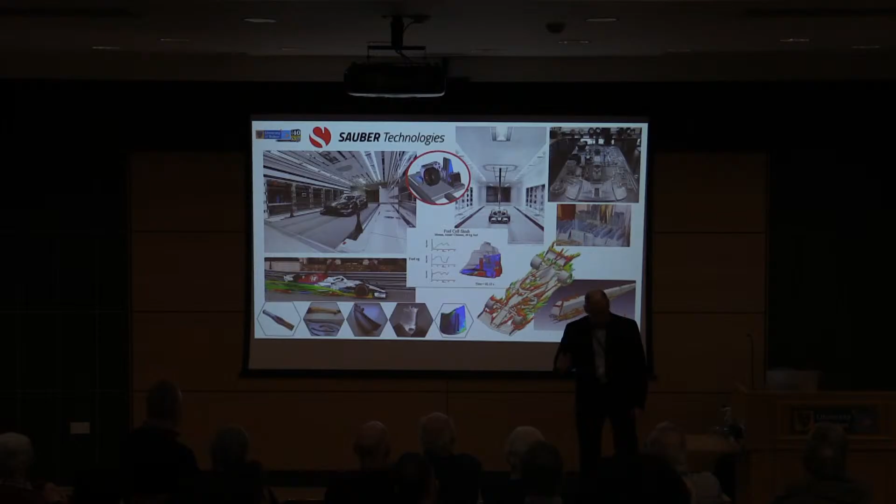A number of teams, when they launched their cars in the last few years, have done a digital launch. And when they've done that, perhaps the students out there in the world have been brighter than, or more aware of, the special tools available than the IT departments in the Formula One teams. A number of teams have had the shape of their cars, let's say, hacked.

You can understand the technical departments will never release the real Formula One car to the marketing people without modification. So in the Aero group at the Sauber company, Alfa Romeo team, the head of Aero design will always stretch this, delete that, thicken that, move this, before it goes as a model to be made for manufacture as a toy. You sort of have to do that. You can imagine if you've got 1 millimetre thick parts on a full-scale Formula One car, you scale that for a toy, it's unmanufacturable.

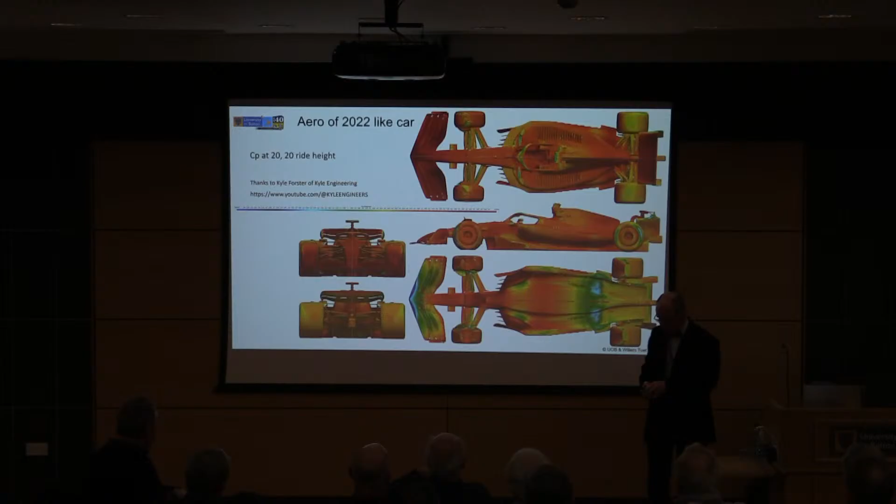But mathematics is fantastic. So you create what we call CPZ - in the Z direction you have a coefficient of pressure, and you convert it so that whether it's above or below, it tells you the difference in pressure relative to atmospheric pressure. If you have anything that's blue on the scale, that's creating downforce. Anything yellow and red is actually creating lift.

So you're creating a little bit of lift in this area where you've got these three turning vanes, vortex generators, whatever you want to call them. But overall, even though you lose here, that creates a change in flow that is beneficial overall.

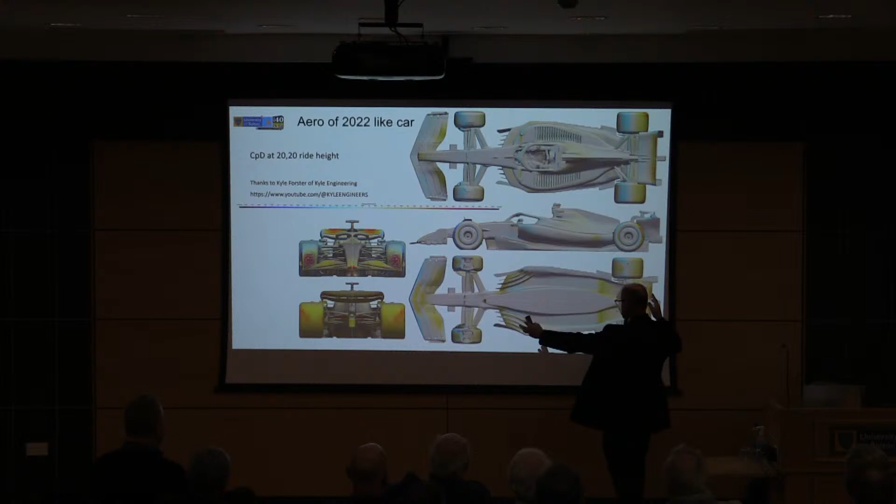Then this plot is CPX, so that tells you the drag, or CPD, drag - it tells you where you're creating drag. There's not a lot happening on the top surface, there's not a lot happening on the underside. It's all happening really in the front and rear view.

For an aerodynamicist to plot like this, you would normally look at this on a much higher resolution screen. This has simulated oil flow on it, and off-body there's a simulation of what's happening with flow rotation, with vortices. That's the sort of thing we would be looking at in great detail, probably in many, many slices going through the car.

A vortex occupies a circular space, it's round. So depending upon the size of the volume you have - in the past in Formula One we had a flat floor with a diffuser and lots of strakes in the diffuser, each one with a vortex inside doing some work. But that was because you had a fairly wide, shallow area with room to put a number of small vortices. Whereas the exit of this is quite big, and in the end you've got room really for one big vortex.

So you can see games are being played - a little bit of air is being let in there to create a second vortex, and these three all add up to create one big powerful vortex that's strong enough to make its way all the way down the car.

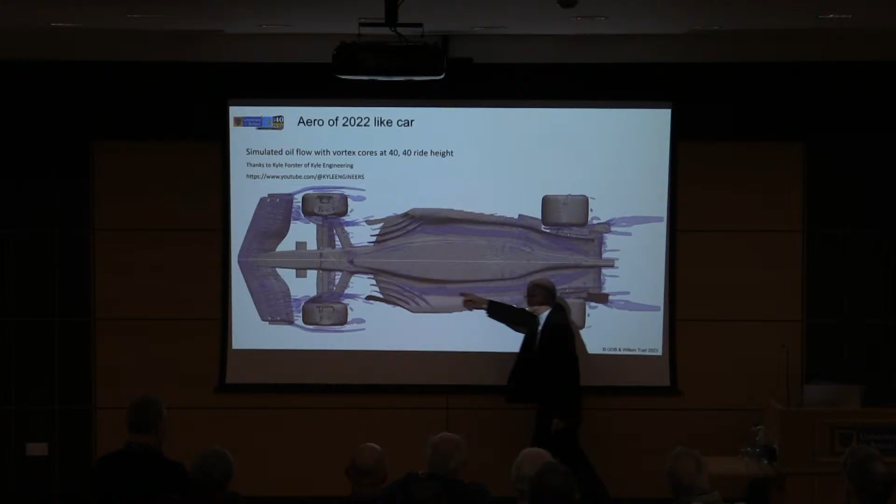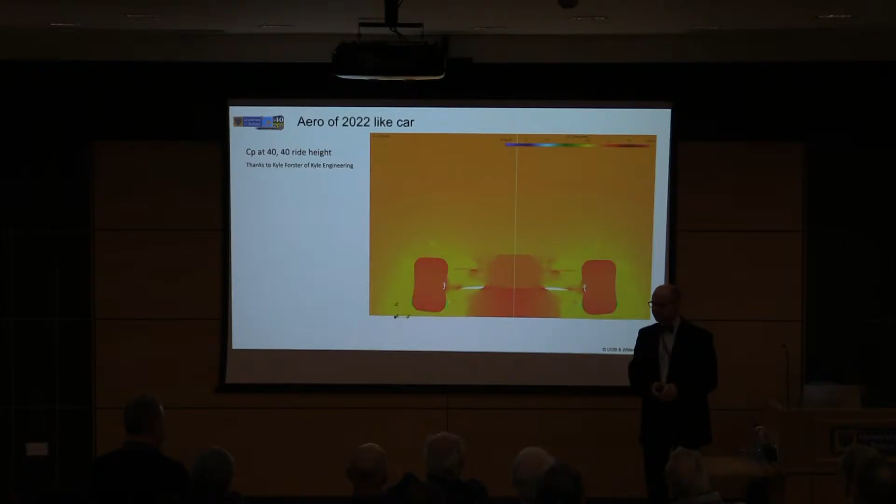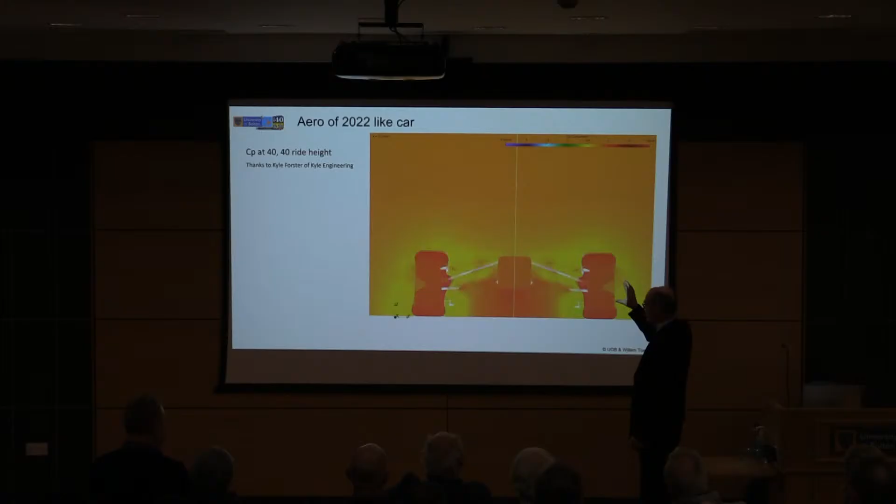So this is stuff in Formula One. Outside of the Aero group, nobody sees this stuff, and I reason it's not the real car anyway - the rules have already changed for next year. Nothing I'm showing here would teach a junior aerodynamicist who's got a job in Formula One anything, but it's interesting for people who are not in that position.

Now I'm going to go back and talk a little bit about some fundamentals of aerodynamics. It would be nice if aerodynamics was simple, but then you wouldn't need a big aero department in a Formula One team. Aerodynamics is really complicated. It's just made up of molecules.

We are in atmosphere, and there are kilometers of air molecules - oxygen, nitrogen. Nitrogen's the biggest, then oxygen, carbon dioxide, water, and then lots of little ones - helium, hydrogen, xenon. There are lots of other gases in very small numbers out there.

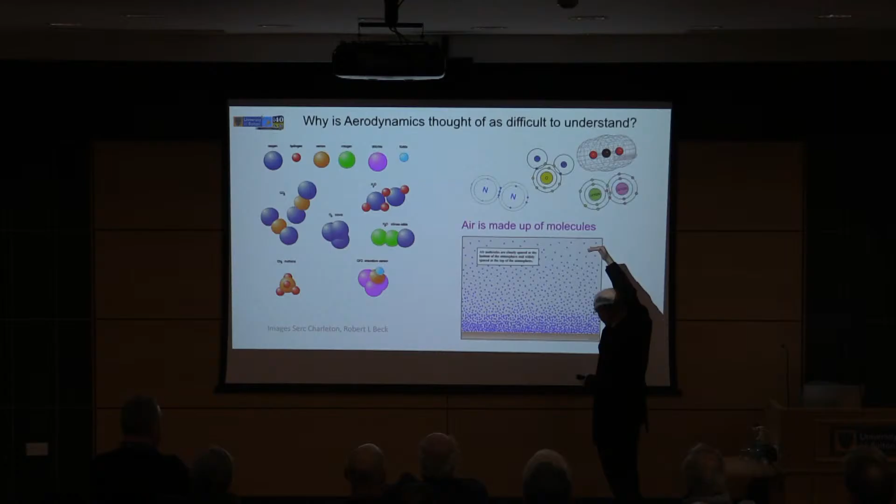Air pressure increases as you come down, and by the time you get to sea level, the air pressure is about 10 tons per square meter - a bit more than a yard for us oldies, square. If you have a vacuum on one side and normal atmospheric pressure on the other, that's 10 tons. So if we're trying to generate 2 or 3 tons on a race car, we only have to generate less than 10% of a vacuum. So you have less than 10% of the molecules hitting the surface, and you're going to generate huge forces.

And that's why the aero groups in Formula One are so big, because you can make such a difference. And there are a huge number of molecules in the air.

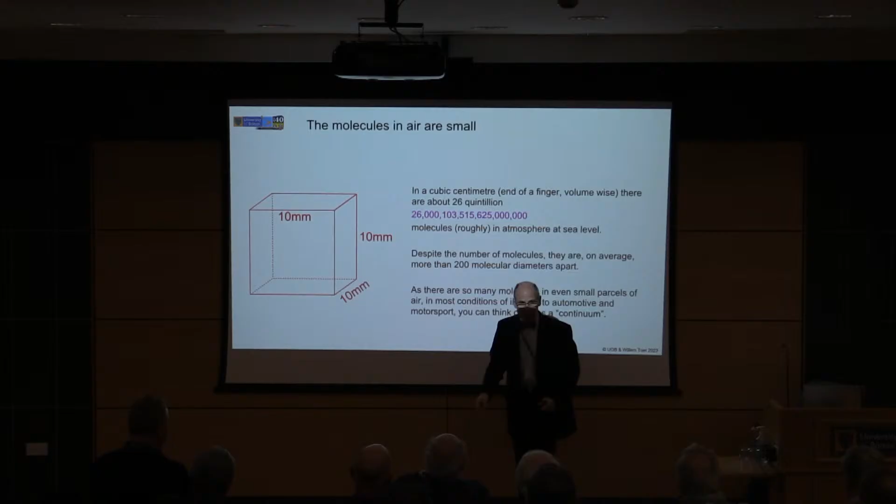26 quintillion - and I've written it out because 26 quintillion, it depends how big your finger is, but the tip of an average finger is probably going to be a cubic centimeter. 26 quintillion - that's a lot of molecules.

Now, not only that, those molecules are actually a long way apart relative to their size. And that's what's actually quite special about aerodynamics.

It was a botanist who was a really keen microscope user, Robert Brown, in 1827. He was looking at pollen particles in water under a microscope, and they were just sort of jiggling around, which he couldn't understand because it's just in still water.

It was Einstein, 80 years later, in one of his first contributions to science, who postulated that it was water molecules hitting the pollen particles that was causing this random motion. In those days it wasn't understood - we didn't know how big molecules were.

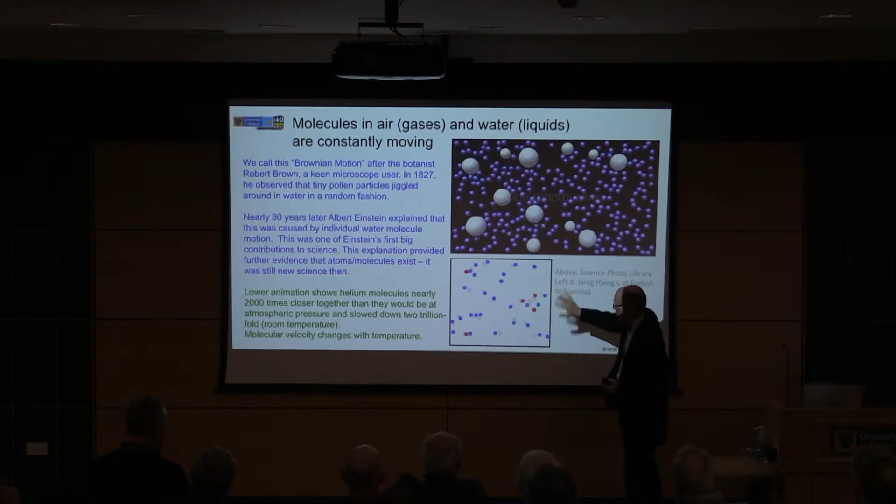This lower simulation carefully scales helium molecules in air, in a gas. The helium molecules are about 2,000 times closer together than they would be at atmospheric pressure, and they've been slowed down so the simulation looks right - slowed down about 2 trillion fold so you can see the motion. So this Brownian motion is staggeringly fast.

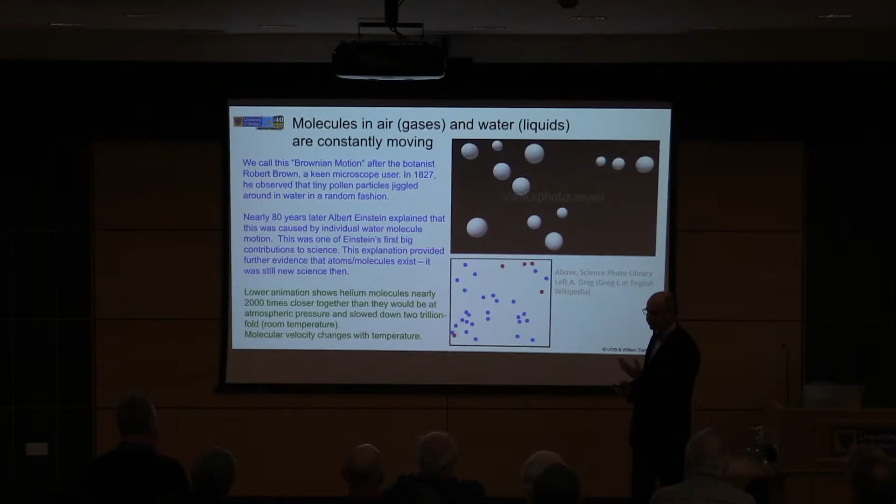And this is what makes aerodynamics so, if you like, challenging and fun. You can just imagine if we're having a bouncing match - I'm only a little fella, so if I come against a sumo wrestler and run like hell and bounce, he's probably not going to move very much when I bounce off him. The same happens with molecules.

The heavier molecules have more kinetic energy, and when, say, a hydrogen molecule bounces off them, it gets thrown further than the other molecules. So each mass of molecule will have an average velocity distribution.

And if you look at the distribution and then ask, where is the speed of sound? Well, the speed of sound is about 1,247 kilometers an hour, 775 miles an hour, or 346 meters per second. We always, in aerodynamics, tend to talk in meters per second. It doesn't sound like much, but it's quite a few miles an hour.

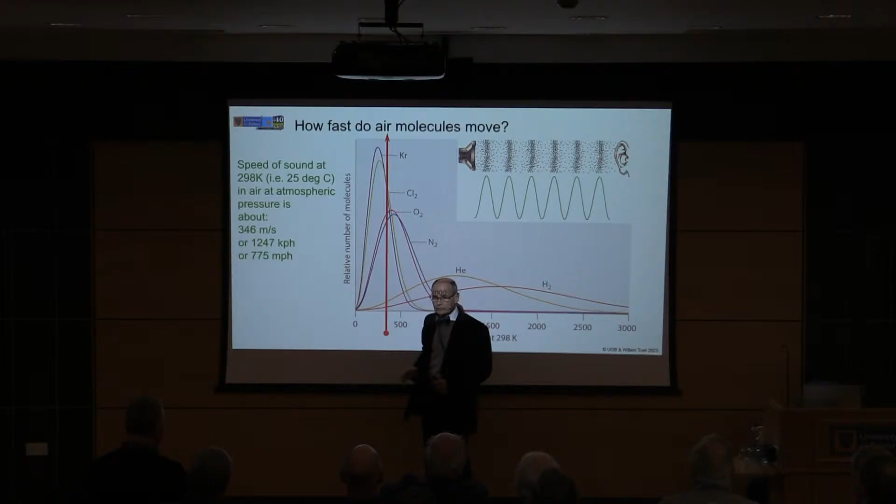And if you look at your average molecules, the majority are nitrogen and oxygen, so they're traveling faster than the speed of sound. But there's about 200 molecular diameters between the average interaction between molecules. So you can imagine - and what is sound?

What do you hear in your ears, ignoring the microphones and speakers? If we imagine we turn those off and I'm talking, I'm moving molecules in my throat. That vibration travels through the air at the speed of sound, and you hear it. So at the back of the room, you can hear me speaking at 346 meters per second.

There's probably, I don't know, 10 meters back here, something like that. So it's not many decimals of a second - it's really fast, and that tells you there can be a great deal of mixing within the air, which is one of the next things that makes it deliciously complicated. And then the velocity of molecules in the air is, if you like, a measure of temperature.

So scientists will talk in terms of absolute temperature. minus 273.15 degrees C is absolute zero. At absolute zero, all molecular motion stops. We can't get to absolute zero, but we can get so close that the molecular movement is so slow that we know at zero it will be stopped. The molecules don't move. In space, depending if you're in the shade of the sun or not, and then as temperature increases, the molecular velocities increase.

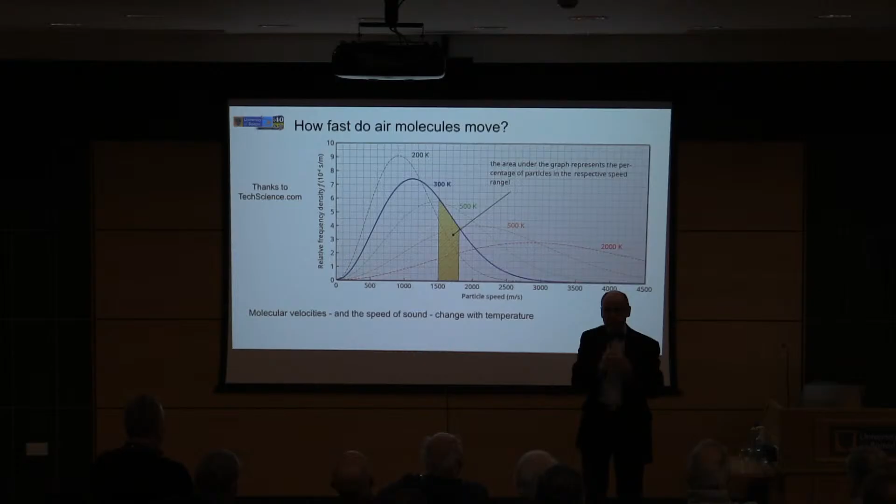So when the space shuttle comes back into the atmosphere, or a rocket comes back into atmosphere, the rocket is traveling fast but in space everything else is stationary. When the space shuttle comes back into the atmosphere, what it sees is gas that, as far as its velocity is concerned, is mega hot. Both are cold if you're stationary with the atmosphere or stationary with the rocket. But when the two meet, that relative velocity means you've got massive heat.

So I'm going to get now very quickly into a few laws of physics. Aerodynamic forces increase with the square of speed. Why the square of speed? If you're traveling at a certain speed, you're interacting with, let's say, parcels of air.

Let's not go molecular size because they're jiggling around so fast you can't do anything with them. But let's go, let's say, a millimeter squared. If you go as big as a millimeter squared, there's like a low-pass filter between every scale within aerodynamics. So you go from your molecular scale up to, say, a millimeter squared - that's huge numbers of order of magnitude. The air can be effectively very still.

So you punch through at a certain speed, you will interact with a certain number of parcels of air, and with each one you will exchange a certain amount of force. Then you go twice as fast, you're going to interact with twice as many particles, but every interaction is going to be twice as hard, exchanging twice the force. 10 times the speed, and you'll interact with, in the same time frame, 10 times the number of parcels of air, exchanging each time 10 times the force. There's your square law. That's the simplest way I can think of explaining it.

Probably the most famous equation in aerodynamics is the Bernoulli equation. Bernoulli, observing airflow and aerodynamics, thought that the pressure acting on a surface was the result of molecules impacting with the surface, and that is what happens. So you can imagine, if you slow everything down a little bit, what might happen, say, on the back end of a car, where you've deflected air away. On the back end of a car, when it's punching through the air, you're likely to have fewer interactions on the rear surface of the car. That sort of thing is relatively intuitive.

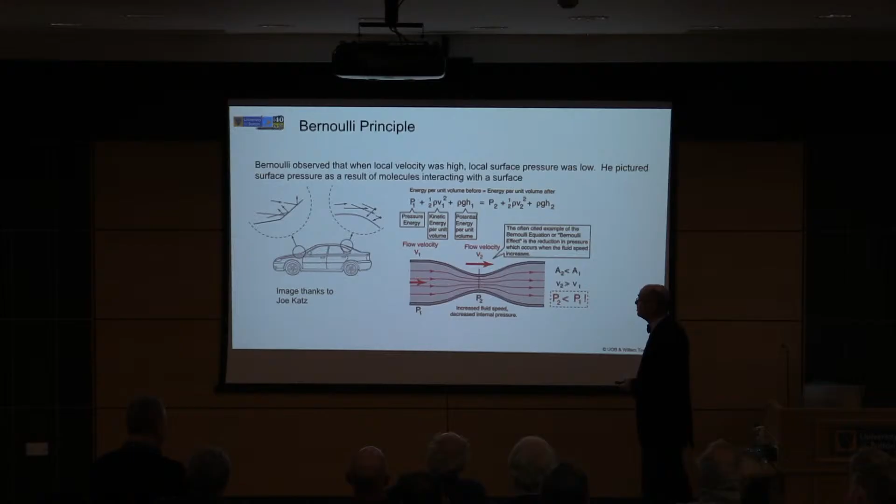But how do you get an intuitive feel for the Bernoulli equation or effect? It has to be along a streamline. Now the key is Bernoulli observed high velocity near a surface, low pressure on the surface. But the shape of the surface is important, so the velocity would be along a streamline.

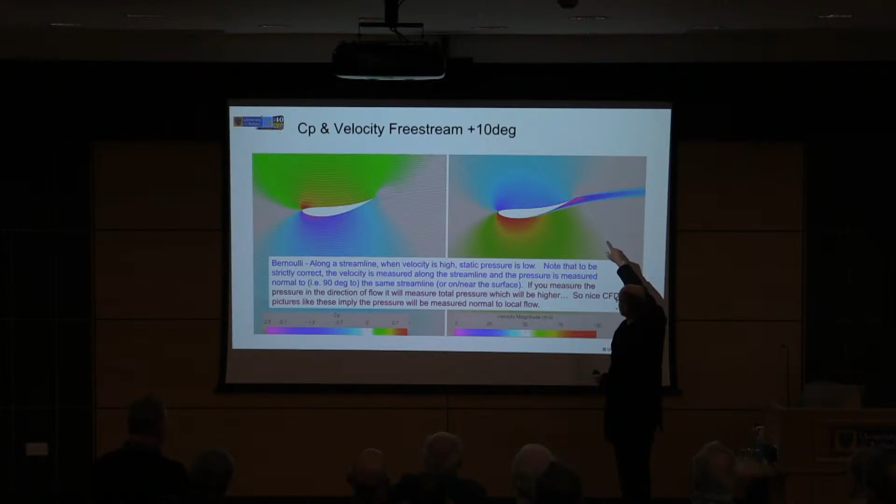So here on the left-hand side, I've got the coefficient of pressure. Purple is a low pressure coefficient, red is a high pressure coefficient. So anything beyond the grey - the green, yellow, red - is higher pressure than standard. And over here on the right, I have the velocity magnitude. Purple is virtually stationary - effectively, what you're doing, if the wing's going through the air, is being dragged along with the wing.

Where you have low pressure, you have high velocity magnitude. This test is being done at 50 meters a second, and the highest velocities get close to double that, fairly close to the wing. Fairly close, not on the wing, but very close. But the important thing to remember is that you've got to measure the pressure on the surface.

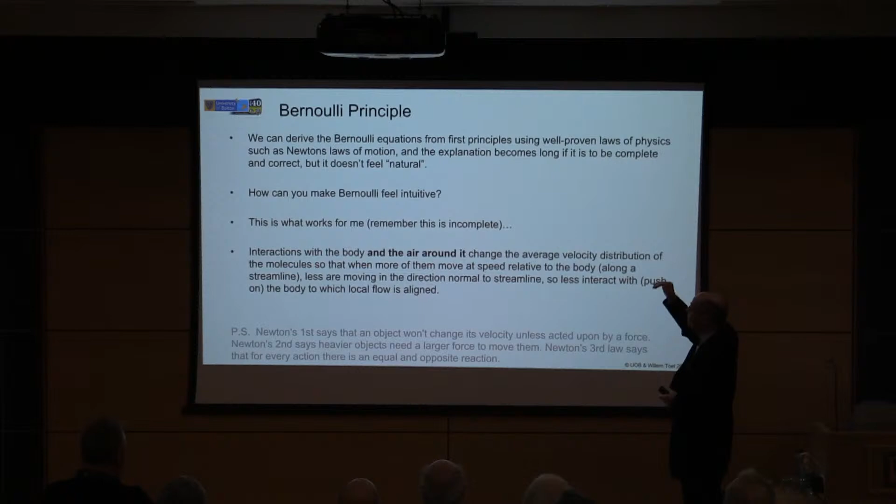At 90 degrees to the direction of flow. So this is my oversimplified explanation of the Bernoulli equation, or the Bernoulli principle. You can derive the Bernoulli equation, and most of the equations that we use in aerodynamics can be derived, and I do teach deriving.

For some people it's like, oh, I think I'll fall asleep, because it's heavy mathematics, but you can derive the very long equations that we use in aerodynamics from first principles, just using very simple laws like Newton's second and third laws. Newton's laws are to do with heavier objects need more force, an object won't change direction or velocity unless a force is applied, that sort of thing. Where a force is applied, you get an opposite reaction. Simple laws that we all understand have been well proven.

You can use those, but that's not going to give you the feeling. So for me, the explanation I use that helped me to get the right feeling is interactions with the body and the air around it change the average velocity distribution of the molecules.

We're not getting into a supersonic aircraft punching through and changing the velocity of the molecules dramatically, but the fact that you can get this fast, distant exchange between energies within the flow mean that the leading edge of an aerofoil or a car, the leading edge of a body, will interact with the flow, and instead of having the pressure acting the same in all directions, you're aligning more of the molecules in the direction of flow, and therefore less of them are interacting at 90 degrees and touching on the surface. And for me, that's the Bernoulli principle.

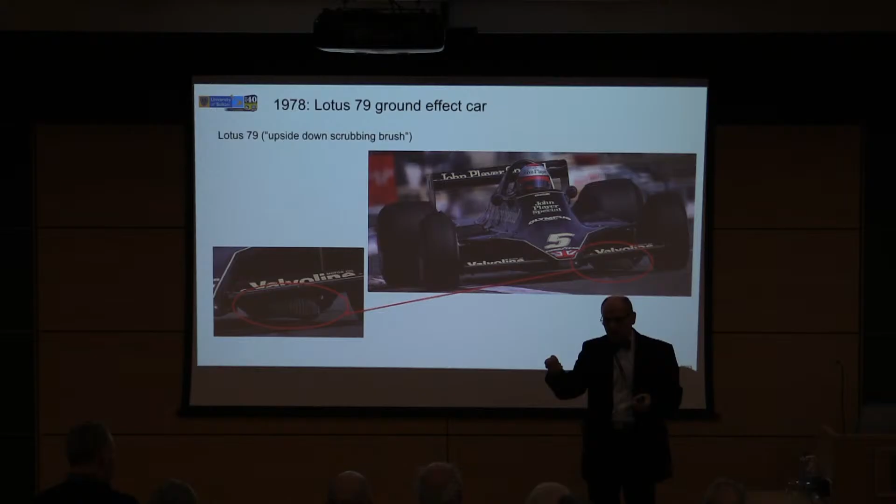They're kinked, which wouldn't work in motorsport, because in motorsport we always have a maximum width, don't we? And you want the maximum power out of the width you've got, so you just go poof, to the end and bang.

So at first, I'm going to use this button, it's easier.

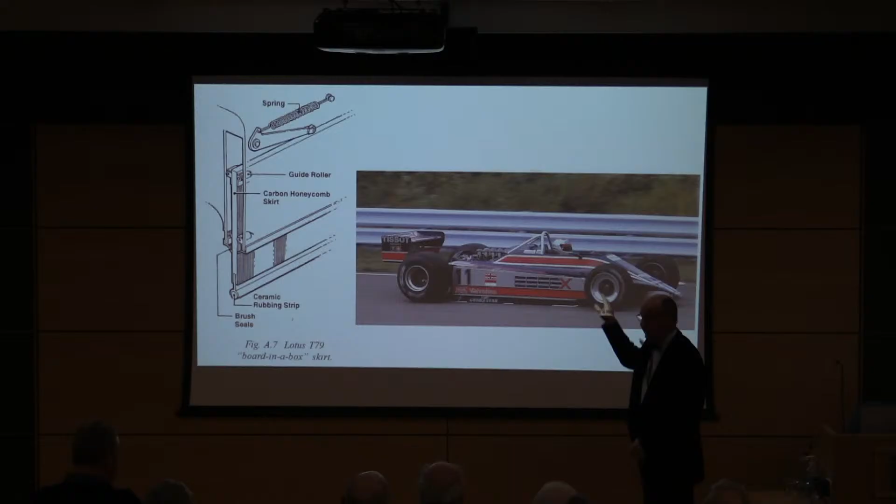At first they started with brushes and then hinges and all sorts of things, and all the teams ended up with effectively a really narrow little containing box and then a sliding skirt, and they all settled on a ceramic rubbing strip, because you can get ceramics that basically didn't wear away. People would try a Teflon strip first, and Teflon's nice and slippery, which is good. Ceramic's pretty slippery too, but the ceramic didn't wear, so the skirts would last a little bit longer.

And we're very lucky that here at the university, Bob Fernley, who's a university graduate, he's a doctor, has formed the Fernley Foundation, and together with Jonathan Kendrick, he runs Rokit. You see Rokit sponsorship on a number of Formula teams, including some Formula One cars.

Both started life, and I'm the same, in what you might call an underprivileged background. My dad died when I was 6. I left home at 16 because I got put in to be an apprentice, and I thought I'd rather give myself more options. So at 16, I'm on my own, and I've got to figure out how to educate myself, how to survive, live, earn money, everything. So I absolutely love the fact that there are people out there who are willing to try and help those who maybe don't have a standard chance, and I'm all for it.

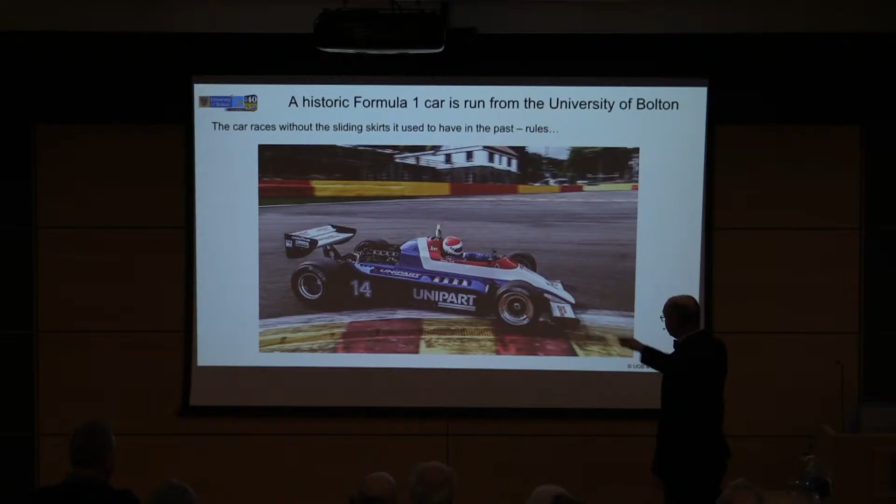So anyway, we have available to us 2 of these cars. One is being raced and prepared by staff, students and help. It's got to race without the skirts, and you can imagine it's a Formula One car. It's the easiest generation to work on, but it's a Formula One car. They're worth a lot of money, and they're not simple, so you can't let the students loose on their own, but with supervision, they're able to learn and do a great deal, which is utterly fantastic. And this car is a winner. It races in historic races, and it's a winner. Had a double win at Silverstone last year, the year before, 21.

But of course, we also want to do a little bit of science. So with help from a company called Evolution Measurements, who supply a lot of pressure measurement equipment to Formula One, they have these little stick-on discs. They're a bit over 1 millimeter thick, and you stick them on the surface, and you do get a little bit of a ripple in the airflow around them. Here are the little discs taped in place with aluminium tape, then you rub it down as smooth as you can, and make sure the pressure tapping tubings that you use to connect to them are running in the direction of the airflow. They supplied us with 256 pressure sensors and all the kit needed to measure it, and we went and did a truckload of testing with that on the car. So you can imagine there is some aerodynamic disturbance, but you get a bucket load of data.

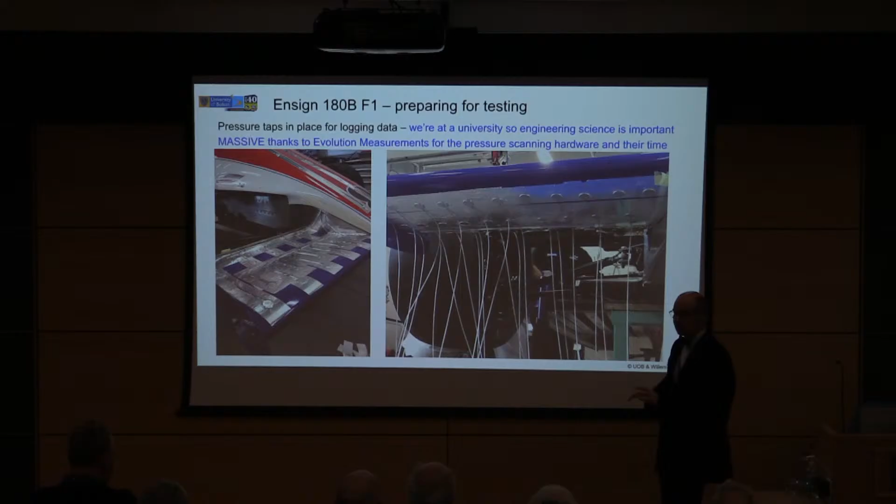Then students, staff and commercial helpers, the company who supplied the Faro arm, and a company who are professionals at scanning, but also with student and staff help, the car was scanned inside and out. From the scan, CAD was created. So once you have the scan, now we have the CAD, because where do you get the CAD of a 1970s, 80s Formula One car? It's all on paper, and you have to recreate it, and you have to know how it was done three-dimensionally.

I learned to create 3D shapes from 2D drawings when I joined the Toleman Group team in 1985, and for me it was a baptism of fire, because it's not necessarily easy. It's a skill where you have to have physical capability, make a load of slices and put them together, and work out how to wash between. I had the help of a really good pattern maker who taught me the skills to do that. But nowadays it's all on computers, so you need the same level of skill, just a different type. You have to do it all on computer. What was fantastic, I think, about creating the car in this way is that it's a warts and all, if you like, aerodynamic surface. Instead of having the perfect design surface that the engineer had in mind, it's what's really been built for the car.

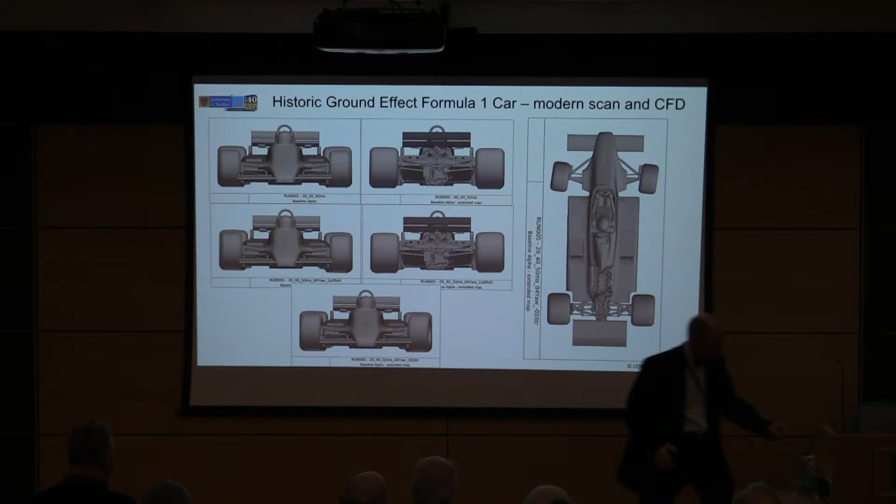So if you look at a few images that come up here, you can see on the side panels there's some ripples, you can see fixings. This is real stuff.

Phones on silent, please. I have had it before where I'm in the middle of giving a lecture here at the university, in the middle of giving a lecture to the class with the students, and my nephew rings up. Oops. And he was persistent too.

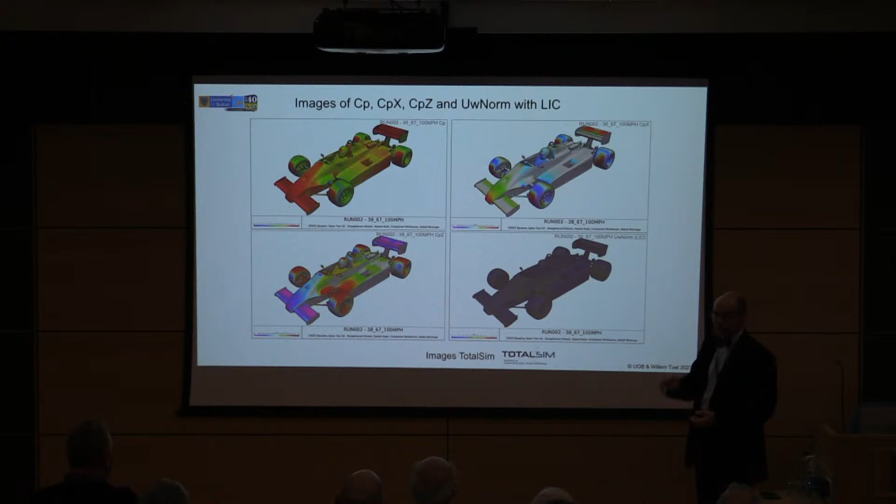So this is just an unbelievable opportunity. So we've had the CAD of the car, and we've now done CFD runs of the car, computational fluid dynamics, computer simulation of airflow, like doing a wind tunnel in a computer. Computer simulation tools get better and better every year.

I was actually on holiday in Australia about a year ago, and I would log on to the computers doing this simulation work. I realized the computers were completely empty one weekend, so I just went mad and submitted a load of cases, then apologized to the commercial person whose computer we were using afterwards. We did a bit of a deal, and I managed to get a pretty complete aerodynamic map.

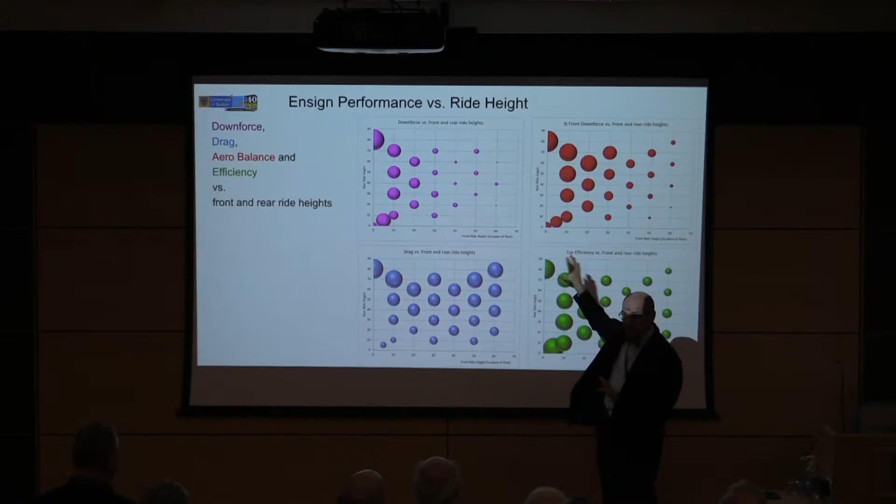That is at 0 front, 0 rear - that's a car on the ground. Now it's never going to run on the ground. This car didn't have particular problems. This is without skirts, because that's how we race it. But for me, this is an alarm point, and we'll get to why.

So we can see various trends. If you want downforce from your floor - or total, because the floor is dominant in terms of downforce - you want to be low on the rear, and also a bit low on the front up until you get to 0. Even at 5.5, your maximum downforce is actually there, but you've got another good point over there. So the front ride height is a really dominant one.

And I forgot to mention, this car with skirts would probably have had a porpoising problem because it comes a little bit earlier. It was the racing driver Mario Andretti, driving the Lotus, who first used the phrase porpoising - he'd seen dolphins and porpoises, and said the car's porpoising.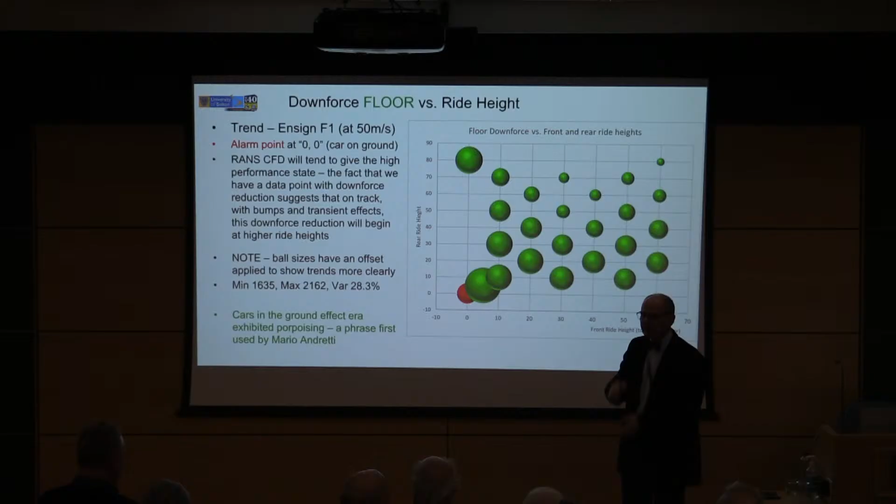So we did some runs - I only did three runs with the skirt fitted onto the car. At one of the ride heights, 50-50, which is relatively high, 2 inches, 50 mil front, 50 mil rear lowest point to the ground, there's quite a difference in the pressure distribution - not on the front wing, not on the front or back of the wheels, but on the whole of the floor area and the rest.

You can actually see there's a negative effect on the rear wing because the floor is working better. You can also see that, for example, this is a downforce generating area, but you're getting some lift around the front wheels and a little bit of lift around the rear wheels as well. That's pretty standard for an open-wheeled car.

So then we get a pressure distribution - above is the baseline case, below is with the skirts fitted. If you look at the top surface pressures, it's quite hard to see a difference. By the way, if you really want to look in great detail at something like this, you take a grid of vertical and horizontal lines in exactly the same position relative to the car on both cases, then look square by square within your grid to really zoom in - that's what we do. We wouldn't just look at a picture like this, it's too generic.

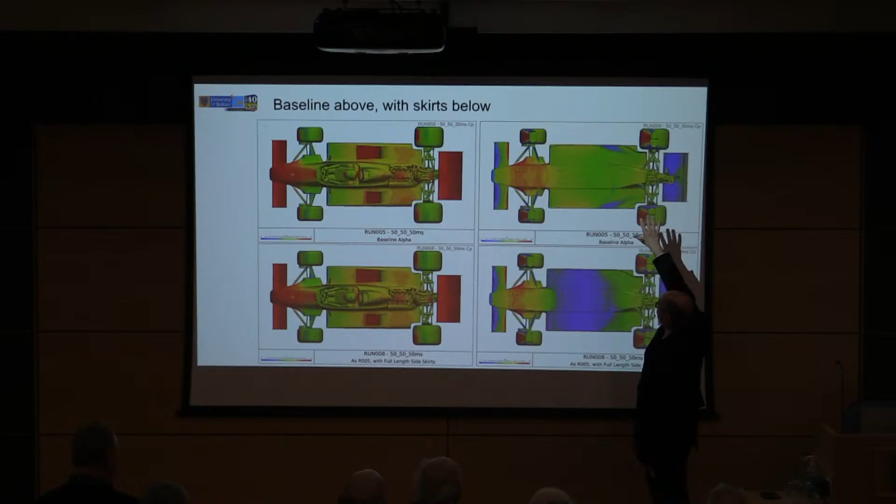But the difference between the pressures on the underside is so dramatic as far as I'm concerned. There you have a reasonable amount of low pressure, but here you've just got another world of low pressure.

You see it as well in these plots, which are quite interesting. This is called an X-ray plot - you look all the way through all the surfaces of the car, add up all the pressures, and see in this location of the car whether you have downforce or lift. You can do the same with drag. This one looks at flow rotation, vorticity, and if it has a vortex, colors it by how much energy there is in the flow. So you've got vortices coming off the leading edge of the sliding skirt in this case, but vortices coming in further back that do quite a bit of damage to the flow.

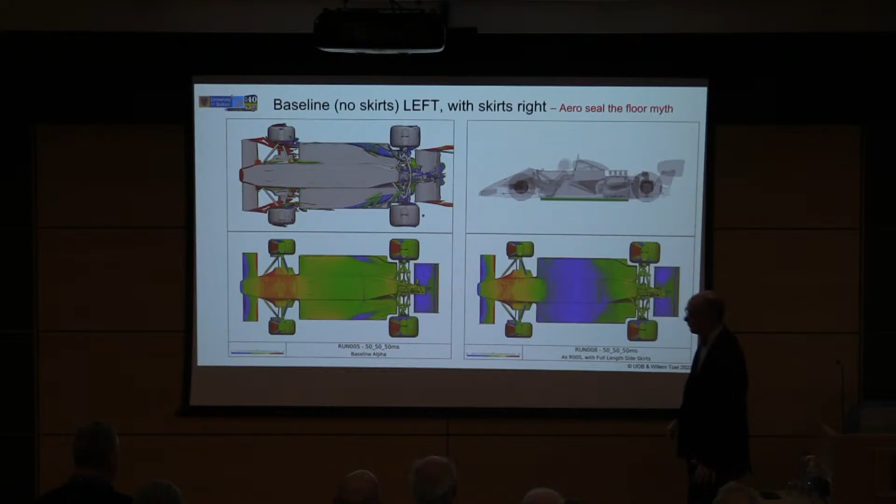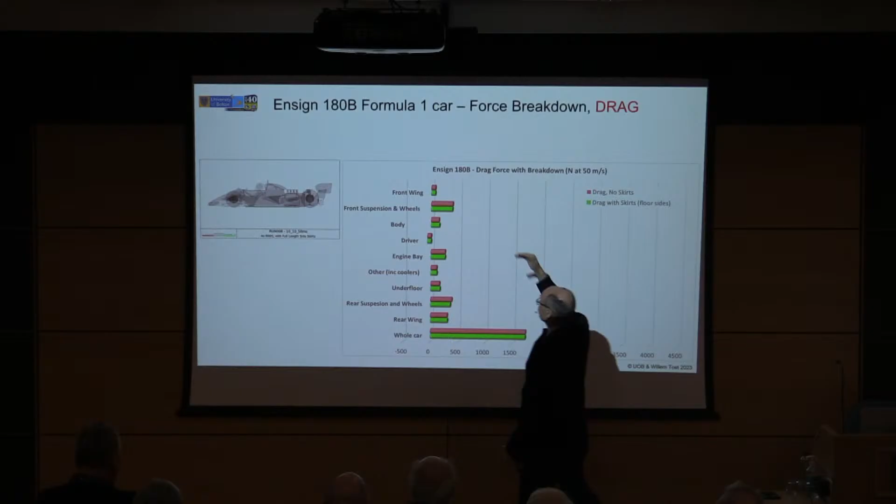I thought, okay, why don't we do a bit of a plot of the breakdown of drag and downforce. What I've done is I've taken three baseline cases, averaged the numbers on the three, and then three of the test cases with skirt, and just looked at the average of the baseline and the average of the with-skirt. When you look at the drag numbers, front wings only got a tiny bit, front suspension and wheels got quite a bit, the body has quite a bit, the driver has negative drag, so that means the driver's helmet is actually being pushed forward by the flow.

It's not the first time I've seen that. Engine bay has some drag, other bits, coolers and so on have some drag. The floor has some drag, a bit more than the front wing, not as much as front suspension and wheels, nowhere near as much as rear suspension and wheels, and nowhere near as much as the rear wing. Then whole car, all added up together.

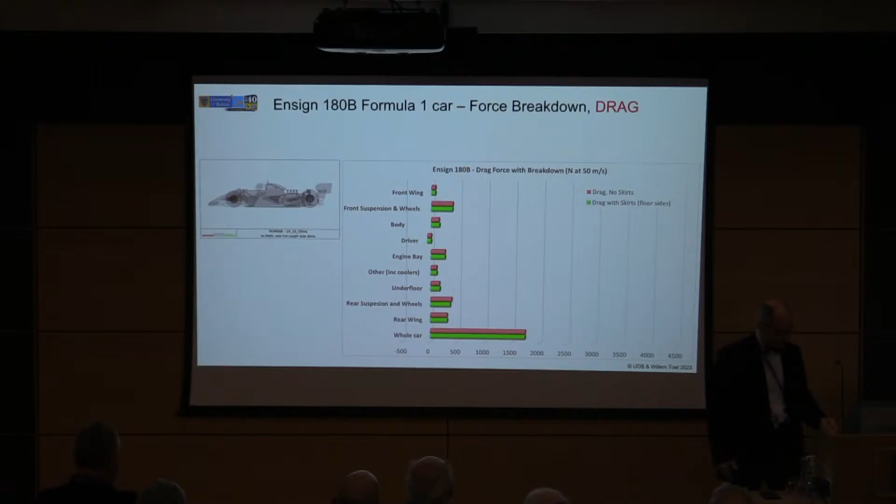Then we look at downforce, and suddenly, instead of there being nothing in it, there's like one item that's changed dramatically, and that's the floor. What's curious is, you look at your rear wing, there's a pretty subtle difference on the rear wing, almost nothing. You'd have to say pretty much dominating the difference is the force on the floor. The average force difference over the three ride heights is about 57% more downforce just by adding those little bits, bridging the gap to the ground.

Monstrous. Now from here, because the skirts in the ground effect era made so much difference, people talk often in the press, motoring press, TV, about using airflow to seal, say, a floor to the ground. That is absolutely not what we do, and I'll explain a little bit later what we do.

The other thing I wanted to mention here, the biggest, at the highest ride height, where it's very easy for air to get under the floor if it's at a high ride height without skirts, at the highest ride height you got a 74% gain in car downforce. Huge, just huge. If you could do that on a car today, you'd be an absolute hero. They'd be paying you millions.

I'm hoping there's someone out there bright enough to invent the next one. Because every generation learns from the generations before and makes their next steps, and we've done that. We've made our steps. But there's always more to learn and more to gain.

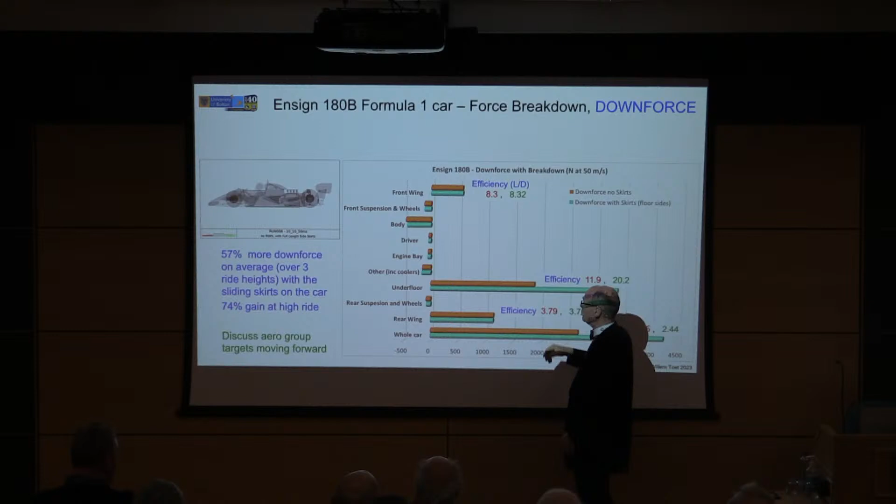The front wing has an efficiency of 8.3 to 8.32 with the two averages of the two types of car. And the floor has an efficiency of 11.9 and 20.2.

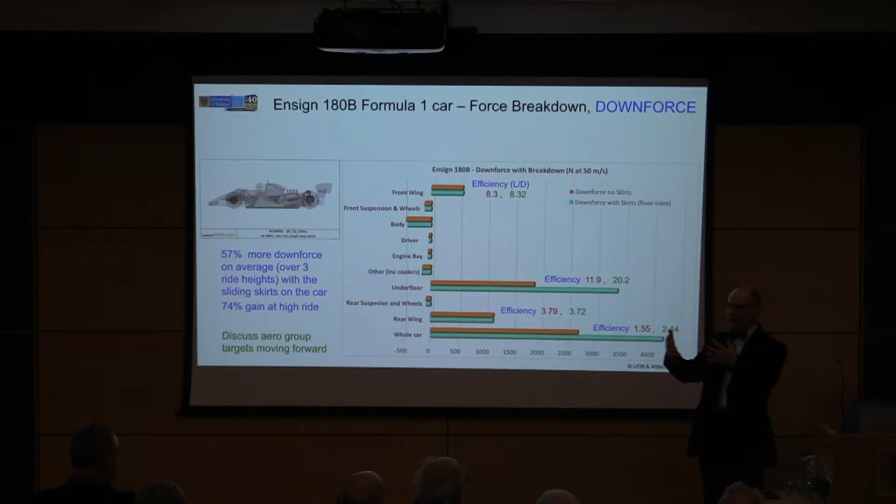So for the last 25, 30 years, depending upon what the rules were, I've been pushing my people: get the floor more air, make the floor work harder, because that's your most efficient device. You make that more powerful, you make the car more efficient. So taking an overview, that's about as much detail as I can get into, which is very boring.

Now, what is ground effect? If you take a wing in free stream, just in the middle of air, and you change its angle step by step, you'll be able to see that the pressure distribution around it will change. You can see the airflow lines, and you can see that the airflow is being bent by the presence of the wing. I've got varifocal glasses, but that's definitely not a straight line at the bottom.

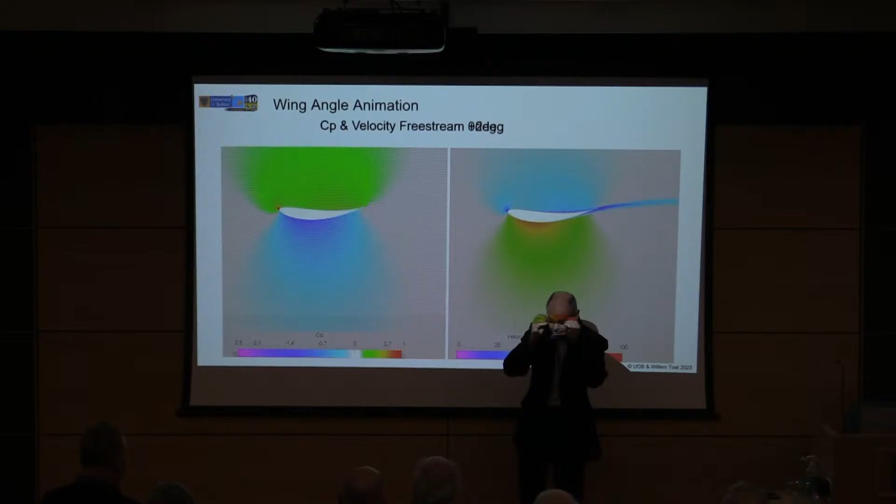You can see the pressure distribution and the velocity magnitude, and as the angle changes, you also see a little bit of stalled flow coming towards the end. What's really curious is that maximum angle I go to, which is 16 degrees on this particular design of flap, it still hasn't reached maximum force, even though you've got some recirculation on the trailing edge.

Aerodynamics is deliciously complicated. Then if you take the same wing, I just pick an average angle, 6 degrees, and we then take the ground up towards the wing. You can see similar changes happening, and you can see you're forcing the flow to be straight.

Then what I did was run these cases, then searched for two cases, one in free stream, one close to the ground, where I had a very similar amount of downforce. These are 12 degrees, 6 degrees - they generate approximately the same amount of downforce.

Now, to understand ground effect, or to understand wings, to measure what the forces are, you will have around a wing skin friction drag - a certain amount of drag because the air is dragging along the surface, or close to the surface. And you will have form drag, which is you integrate, you add up the pressure acting on all little parts of the surface, and you can divide it up.

I've done this before, for example, on a helmet, to measure the force on a helmet when we were in desperate trouble, 1989. Johnny Herbert was in the car, little fella, had a bad accident in Formula 3000, was struggling, especially late on in races. He'd broken his foot so badly that he was struggling to apply enough pressure to the brake pedal, so he was an easy target for people to overtake.

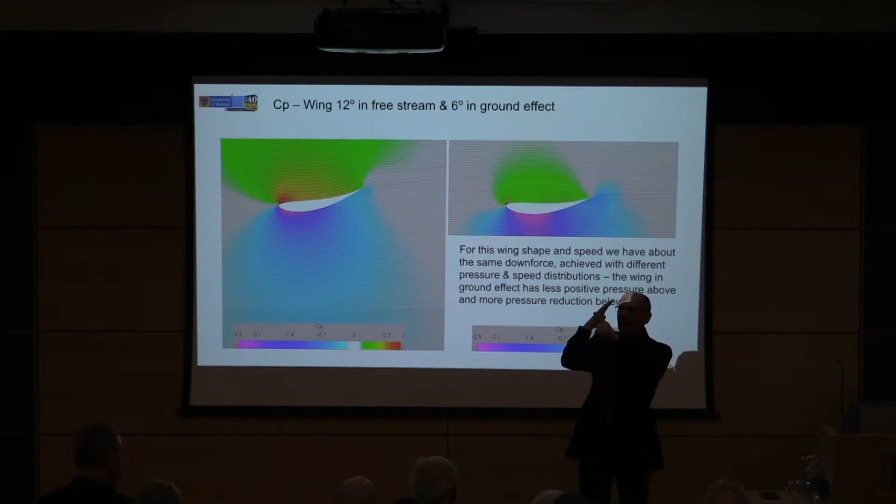And so we did 32, and I associated each part of the helmet with 1/32 of one half of a helmet. With each part I said, right, there's the vector direction, and that's the amount of area I'll pretend that pressure acts on this area, and added them all up together.

I added them up, did my calculations, what speed is he running? Okay, he will have 5 kilos of lift. That's quite a lot. And I thought, no, I've used half a helmet, he'll have 10 kilos of lift. So you imagine 10 kilos, it's actually around your throat, which is quite delicate. So the poor bloke was really struggling.

So then we had to quickly do some work and find some solutions. We found some solutions, and they were like, put a foam strip at the back of the helmet to trip the flow and stop it circulating around the helmet. He, Nelson Piquet, other drivers after them, they all wear little flick-ups now. But in those days, they were like, you are kidding me, that's never going to work. And then you put it on, and it actually works. Wow, this is a black art, it's really odd science. But anyway, the trick of adding up the pressures works.

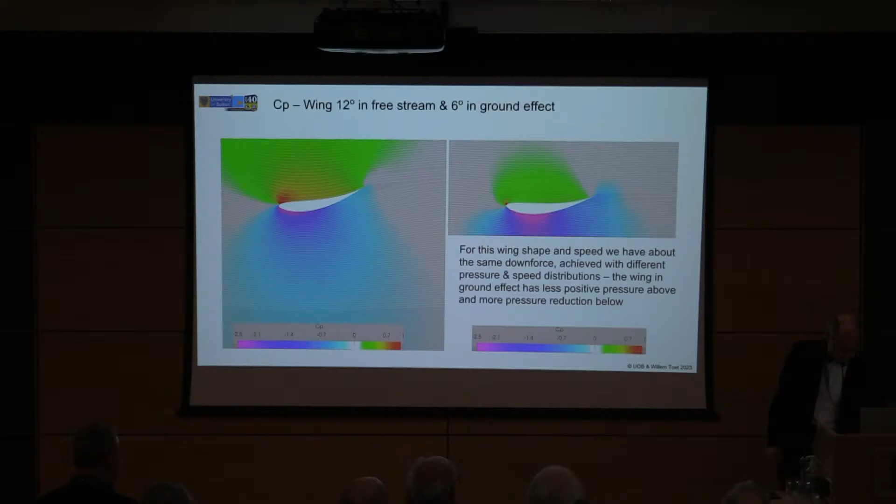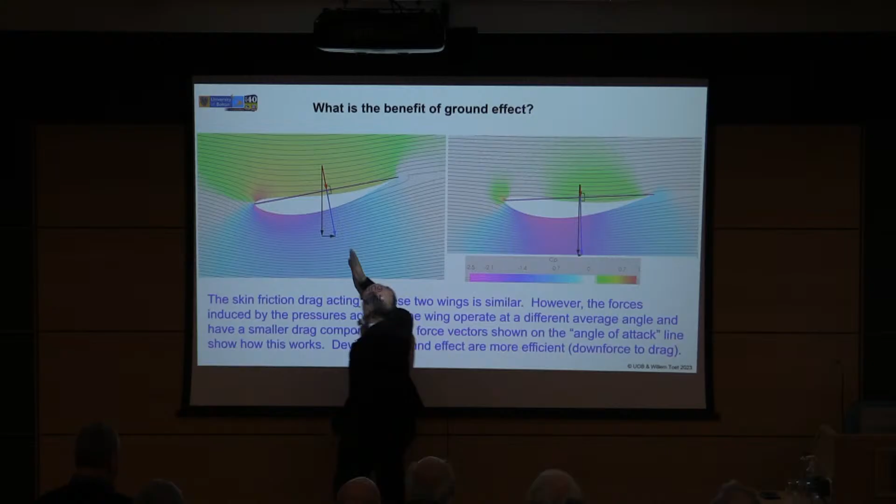But if you simplify your wing, just to get a feel for what we're doing, let's simplify the wing to a straight line, because on average it's going to be somewhere in there. Then the pressures acting in that straight line will have a certain vector that's pulling you backwards. The pressures acting on an average of that straight line will have a much smaller vector pulling backwards. That, for me, is the benefit of ground effect.

And we didn't invent ground effect, by the way. Birds invented ground effect. Swans, big geese, big heavy birds, they have to basically start flying close to the surface. So they start on the water, close to the surface flying, and so ground effect works in both directions. Aeroplane landing, aeroplane takeoff, works in both directions.

So they banned the skirts first, then a few years later they banned ground effect floors, and we had to go to a flat floor with a diffuser, so we just started work. Of course, we expected this is inferior science, but we're going to do it anyway because we're going to make a difference. And the truth is, it didn't take us very long at all, and we've ended up being able to pass the power of a full ground effect car.

So to tell you, I've looked at the data, and I've asked permission to tell you the difference, but I've been told no. So all I can tell you is, in round figures, a current Formula One car will have a very similar level of drag to the Ensign, and will have about double the downforce. Last year's Formula One cars, say 2020, were probably pretty much a peak, and would have had about 2.5 times the downforce of that Ensign, even though you don't have ground bridging devices. We've just used different science to find a better way.

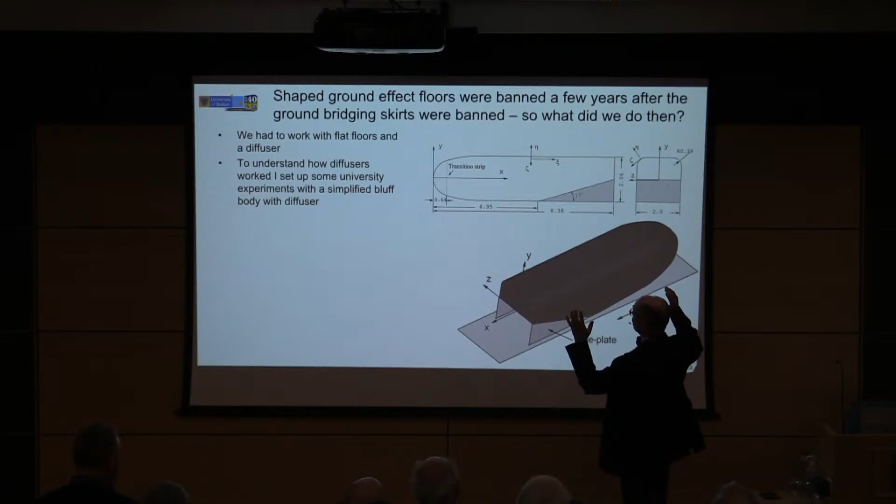So I wanted to understand, right, what's the science behind a diffuser? So working with a university, and when I was at BAR and Honda, we used a simple bluff body with a diffuser, working in ground effect, for scientific studies, and we ended up being able to plot different angles of diffuser. You end up with a very similar amount of performance with lots of different diffuser angles, but each one has a peak at a different height.

And the best performing is actually the steepest one, has a fairly wide area where it's flat, and low-angle ones never achieve peak performance. So, for example, this 5-degree diffuser never achieves it, even if you put it on the ground, it still doesn't achieve maximum performance. But they all fall over at a certain point.

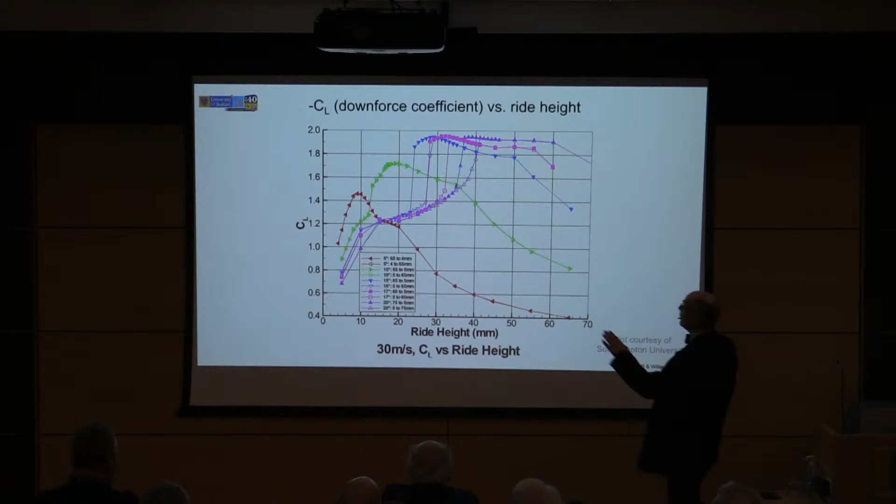So if we pick one, when you take your bluff body with a diffuser and you have a certain performance and you start to bring it down, as you bring it down, the coefficient of lift, the aerodynamic downforce, increases. Then it sort of slows down the rate of increase, and then at a certain point it will just fall off a cliff almost.

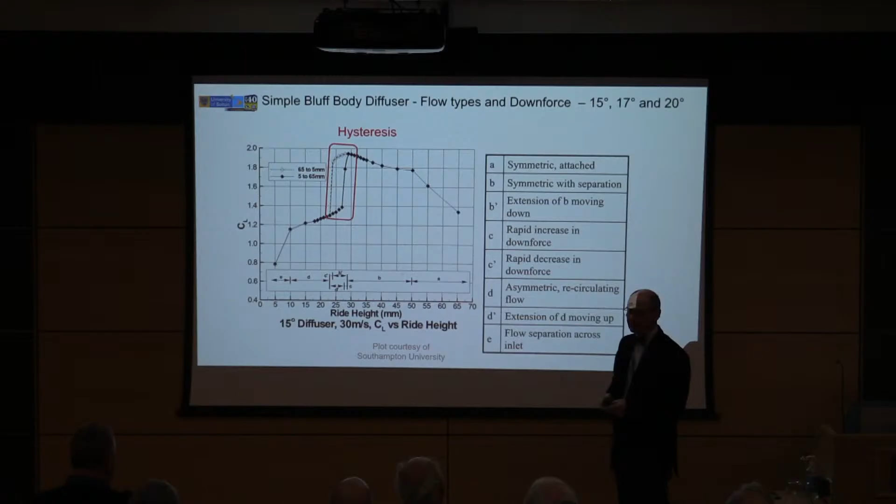People have surmised there are these steps in aerodynamics, but what very few people talk about is that on your way down, you keep the good flow until eventually the air doesn't hang on anymore and it lets go. But it's such a big change to the airflow that the car's got to come up quite a way until it reattaches and gives you the good power again. That is the cause of porpoising, it's the fact you get the step, but the stall and the recovery happen at different points.

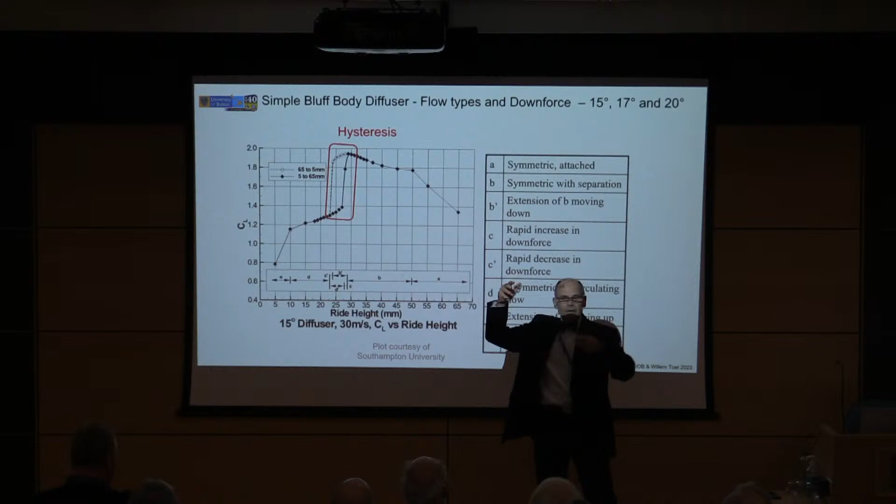So you get a stall and then you've got to wait for the recovery, and in the meantime the car starts to get pushed back up on its springs, then it reattaches, creates downforce again, gets sucked back down on its springs, and that's the boom, boom - there's porpoising. And that's hysteresis.

Up until 2022, we didn't have this problem because we had a plank underneath the car. We had a relatively narrow reference plane right down the bottom, then a step plane 50 mil higher than the reference plane plus the 10 mil plank. So we had a minimum of 60 mil of air going to the floor and diffuser of the car all the time, and with a relatively limited angle on the diffuser, not much expansion, we never were able to get to that point.

In fact, you could take the rake of the car all the way up. Raking the whole car to try and... actually the rake of the whole car was not about aero power, it was actually about aerodynamic balance, but maybe we'll see how we go for time.

And the airflow patterns you get - flow visualization paint is a really nice way to look at what the flow very close to the surface is doing. In the area where you're getting an increase, it's very early on, the car's very high up, you're getting a little bit of a gentle increase in force, then a very smooth, controllable pattern. You do get some visibility of the vortices.

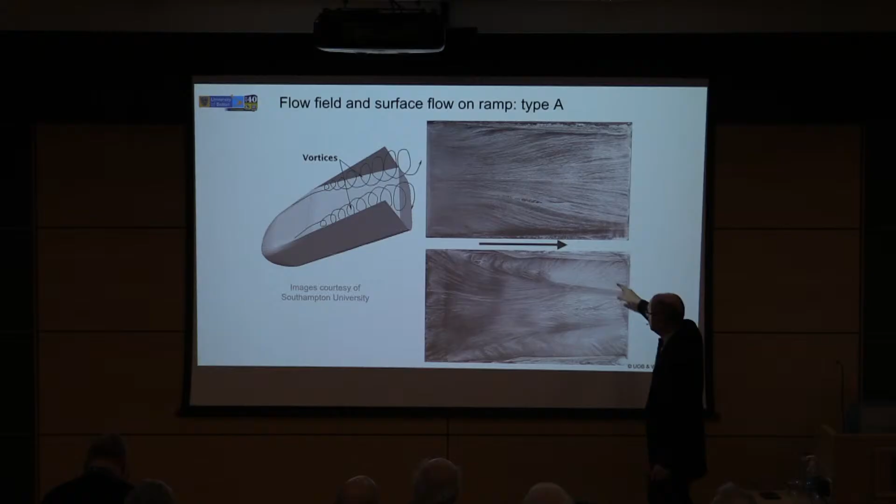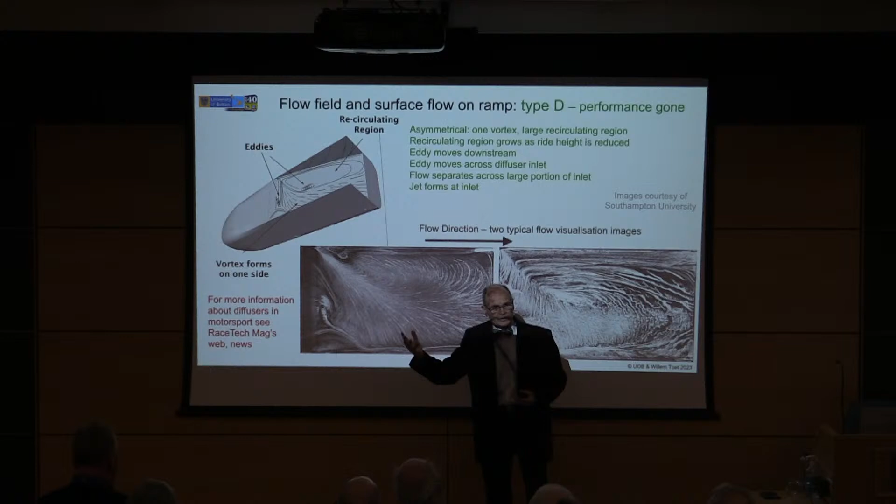In the maximum downforce area, with a bluff body diffuser, a simple one like this, you get flow that looks quite complicated, and it looks like it's already let go, but it hasn't. Then at a certain point, one of the two vortices will burst, and that's the point where you get the cliff in performance. It's quite intuitive that with this sudden drop, this sudden change in airflow where one vortex bursts and the other becomes dominant, it sends the flow all the way over - you've got to get quite a big change in conditions before you revert back to the other flow type.

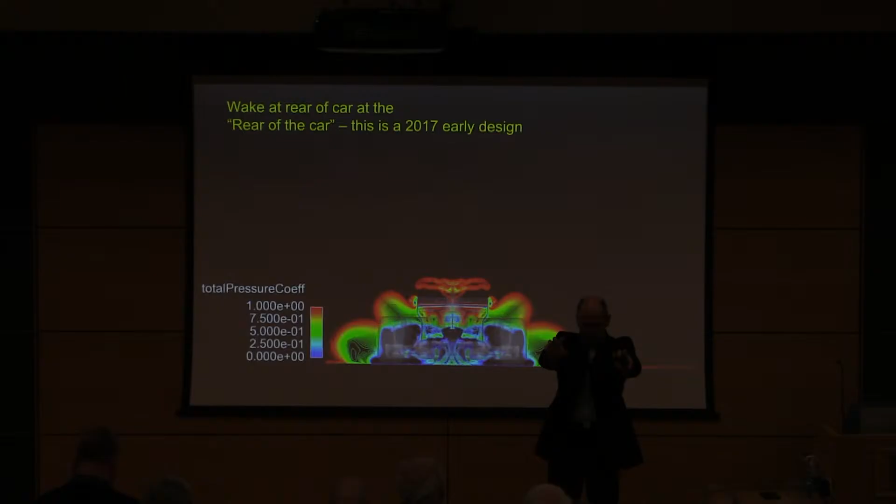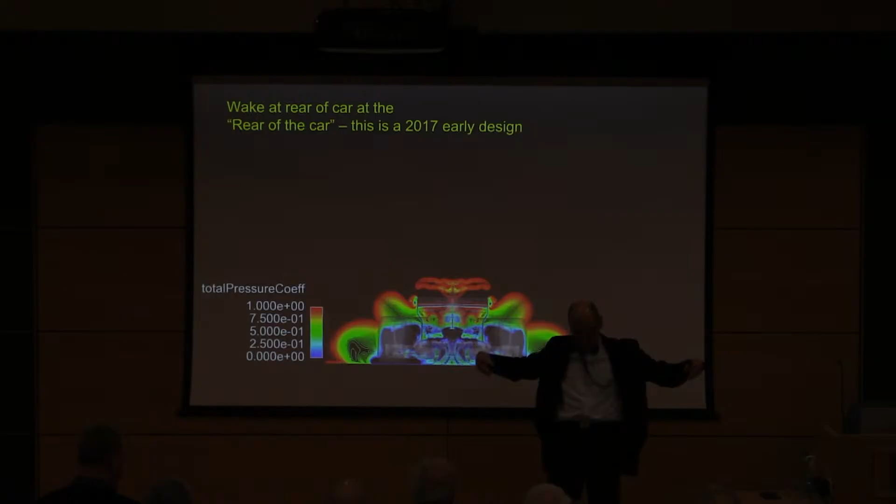Up to and including 2021, we were using all sorts of tricks to get more downforce. That meant we had a wake behind the cars dragging a load of air along, and the wake was very wide - a lot wider. There's the wake of the front of the car - we're punching a load of air outwards, and if we take the air about to come inboard of the front wheels and punch a load of it out, some air's got to rotate in to replace it. We used that trick, punching the air out, to rotate air in and go under our floor. That had the consequence of making a wake behind the car that was massive, and that wake stayed really wide, which is what made overtaking particularly difficult.

So Formula One management got to work on this a few years ago. They created quite a small team - in my opinion, they don't have enough resource to do this job properly. I don't know how many people they had, but listening to what they've said, I'm guessing they had 15 people in their aero group, very smart people doing a sensible job, wind tunnel testing and computational fluid dynamics with third-party providers. They did wind tunnel testing at the Sauber facility, where they manage the facility - we don't go in, they manage it. They're doing everything themselves. We just provide a 55 million pound wind tunnel, and they go in and turn it on and drive it. We have operators driving it for them, but they control what is done, and we don't even see the data.

They take everything away. So they did a program in the wind tunnel plus a lot of computational fluid dynamics, and they came up with their design. Part of it was styled, so they'd have stylists working along with aerodynamicists, interested not only in the performance, but also the look.

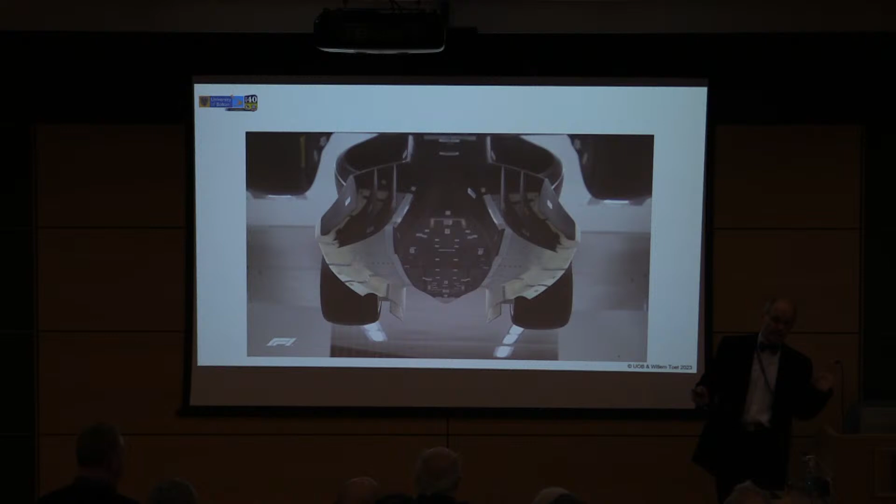They very happily released a load of videos of what the car was, so I've taken stills from their videos that they've released into the public domain. I'm happy to show this stuff because it's all in the public domain. You need to know how to find it, but it's all there. So quite a different looking car to what we've had in the past.

An interesting thing for me is within the regulation, the way the rules have been communicated now is a little different, in that the rules are communicated in CAD files. Thanks to a student in race car engineering, this is one of the images they created, which shows you can have the surface of your floor somewhere between these two yellow lines, but you've got a low point here, and after this low point you have quite a long and extensive expansion.

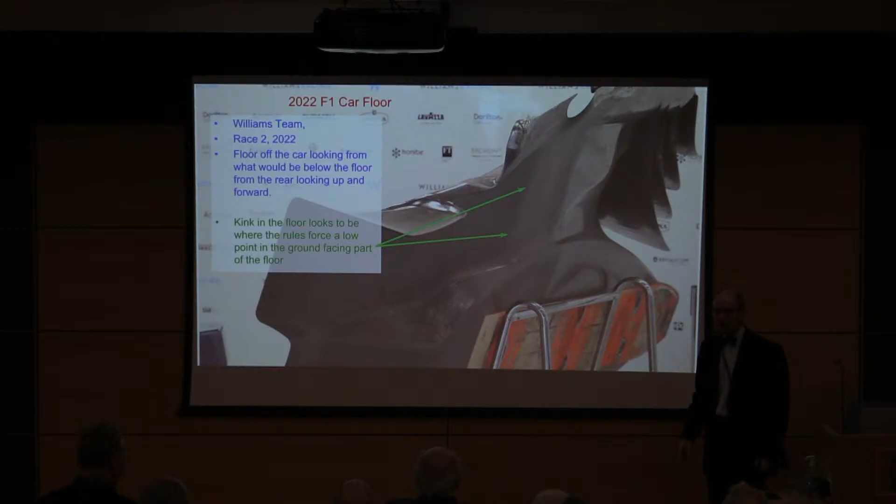You sort of see, looking at images of the cars, that in some of the floors, occasionally people will be generous enough to leave their floor exposed where a photographer can get a good shot of it, and then you can see quite a lot.

And there's our porpoising, which is another reason why porpoising was hard for the teams to find, and you can imagine as a driver, it's not high G, but that can't be doing his neck any good, yeah?

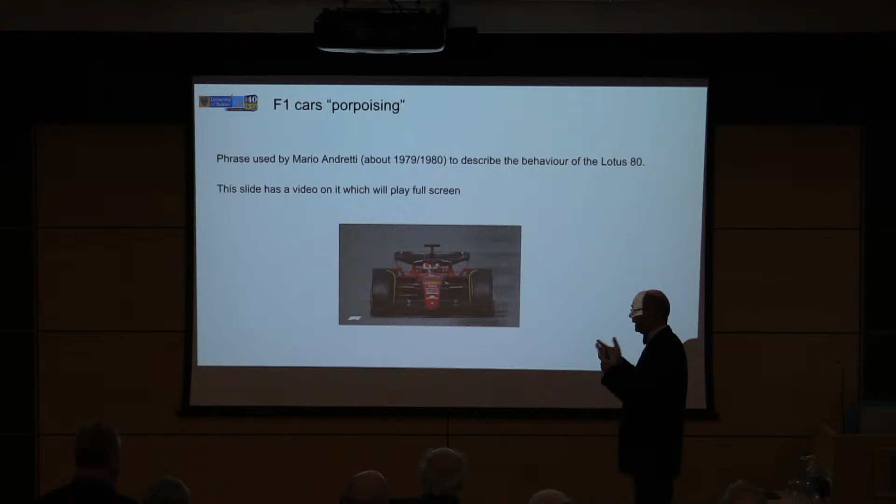But also this year, or last year, they eliminated the rotary dampers that we used to have, the inerters that we used to eliminate a natural frequency of the car's oscillation. So you got the tyre bounce, you have the aerodynamic cause initially, and then the mechanical tools we used to use to fight it have been partly taken away.

I want to introduce very quickly another law of aerodynamics. We have what we call a no-slip rule in aerodynamics, which I found extremely unintuitive. When you blow air over a surface, on average, the molecules that would actually interact with the surface are stopped in the flow direction. They'll bounce back up, but they're stopped in the flow direction.

It's not until you get your head round it - look at the smoothest surface man can create. What's it made of? Atoms and molecules. So it isn't going to be silky smooth, it's going to look a bit like that. And then what's going to interact? Oxygen molecules, nitrogen molecules. So people will claim to have the smoothest surface in the world, but it's still made of molecules, and most of them are not perfect.

And you add to that the electrostatic interactions, molecule to surface, and then on average - and we've validated this with the smoothest surfaces we can find with measurements - the flow effectively is stopped at the surface. Totally unintuitive, that's the best way I can get my head around it.

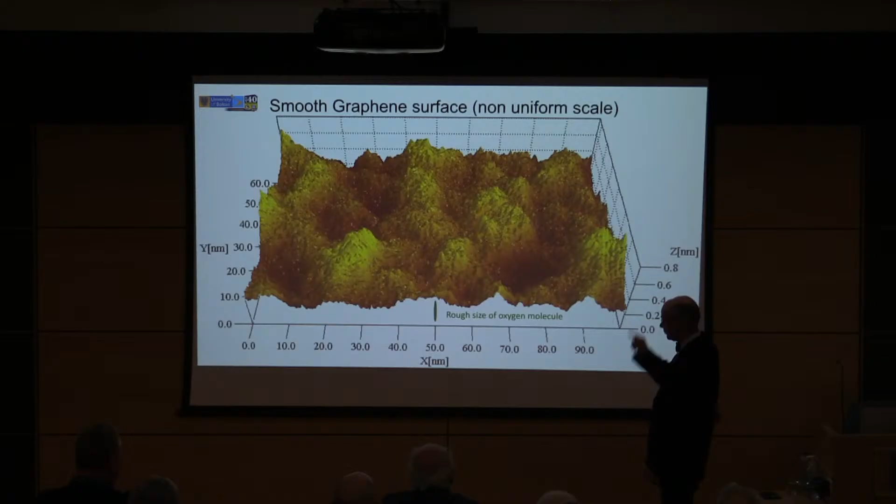So then you get a boundary layer built up, and a boundary layer starts what we call laminar. The terms laminar and transition into turbulent were created before we knew about Brownian motion, because it makes little sense when you consider Brownian motion.

The flow is, let's say, smoother in a laminar boundary layer, and on a clean surface the flow will start laminar and then eventually tumble up and start to become more turbulent, where within a turbulent boundary layer you get more mixing. But the fact that you're stopping molecules on a rough surface in particular will propagate out and give you a boundary layer that's quite thick.

A boundary layer - the limit of a boundary layer is randomly defined, and really it is quite random - it's 99% of free stream velocity that marks the edge of the boundary layer, and someone had to come up with that number when boundary layers were first studied. If you have a laminar boundary layer, it's quite thin, and then a turbulent boundary layer will be, depending upon the speed, quite a bit thicker.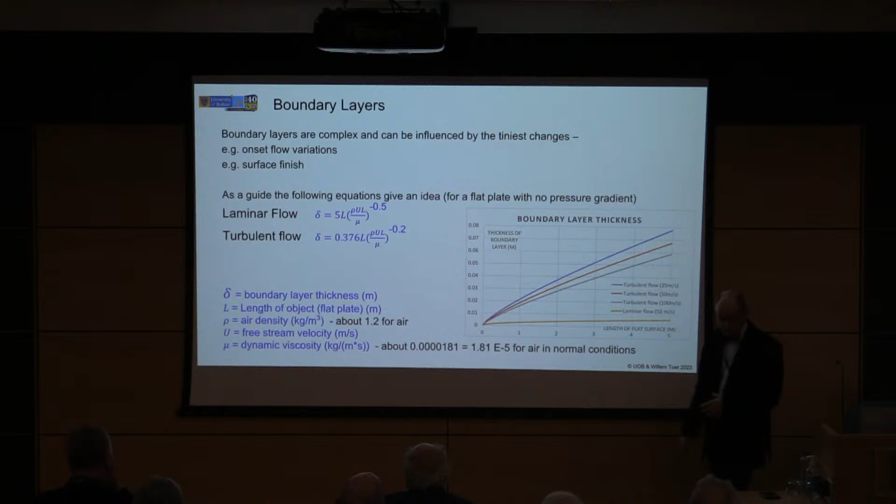A rough surface is going to create a turbulent boundary layer more quickly. So you can imagine an old whale with a lot of barnacles on it is not going to have any laminar flow on its tail fin at all. But what's really interesting is the young ones have to wait until they develop barnacles before they can swim as fast as the old ones, because the barnacles on the tail allow them to create turbulent flow with all that mixing of water. Turbulent flow can handle a pressure gradient, what we call an adverse pressure gradient, better than laminar flow. Laminar flow will separate catastrophically. So you need the barnacles for the whale's flipper fin to work.

And the reason I wanted to talk to you about boundary layers is, I surmise, I suggest, Mercedes last year, having won the championship many times with a consistent philosophy of how they do their work - they are a fantastic team. They're a very difficult team to beat.

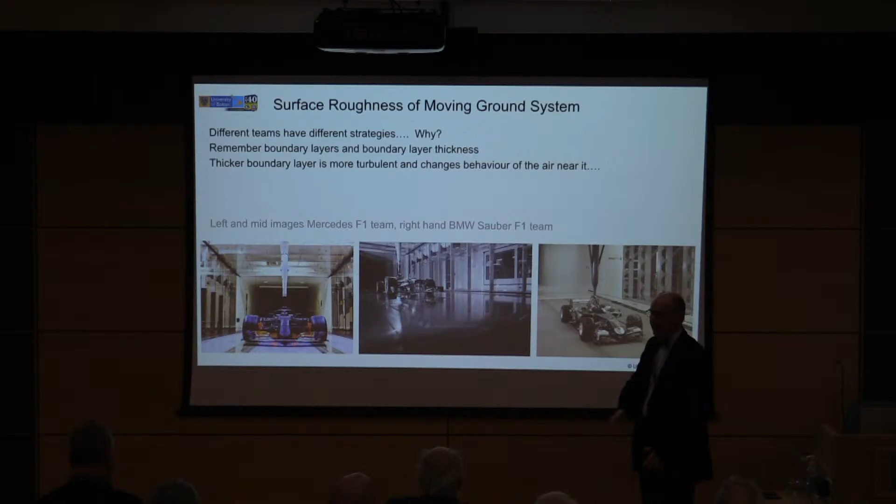In a wind tunnel, the roughness of the belt will change the way the boundary layer grows on the belt. The belt and the wind are travelling at the same speed, so you start with no boundary layer because the belt and the wind are just travelling together. But the presence of the car accelerates air underneath the car, and that builds up a boundary layer.

So if you have a polished floor - these are two public domain images that Mercedes have put out there when advertising for people and various other marketing things - you can see that the surface that the belt runs on is shiny. Mercedes are very good at putting some rubbish parts on for test one, that sort of thing, but that's very cheap compared to having to move a belt out of a wind tunnel. The belts are heavy, it takes quite a time to remove them. You wouldn't waste your energy putting a shiny belt on just for the sake of it. You can see this one, I would imagine this might be a Teflon coating, something like that.

And we'll get tyres from Pirelli. In the past, we didn't have to use, by regulation, Pirelli tyres in the tunnel. If you were going to a tyre manufacturer to manufacture maybe some special tyres, some tyres that might simulate a cornering condition, would you go to Pirelli? Well, no, because they're going to supply everybody else, aren't they? So you go to somebody else who's a tyre specialist and you get your special cornering tyres made.

You can't do that anymore. But the tyres you run in the wind tunnel, you want them to last a long time. A tyre for a Formula One car will last 200 kilometres. We used to be able to do hundreds of thousands of kilometres in a year in the wind tunnel with our model tyres, and so you can't tear your model tyres to pieces just like you do a race tyre.

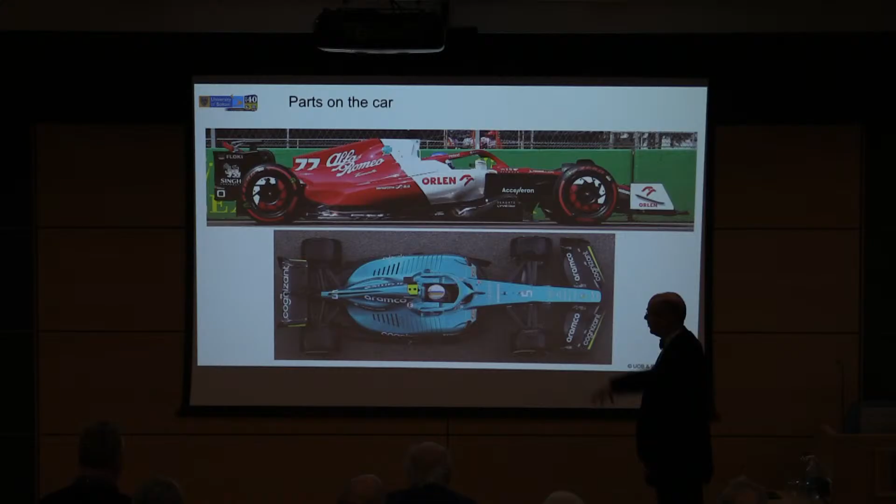Now, I think the sensible thing might be to open up for questions. I had 250 slides that I was going through, and I've deleted a load. What I have next is a load of pictures of the cars, looking at details of the cars, mainly to show that they are so different.

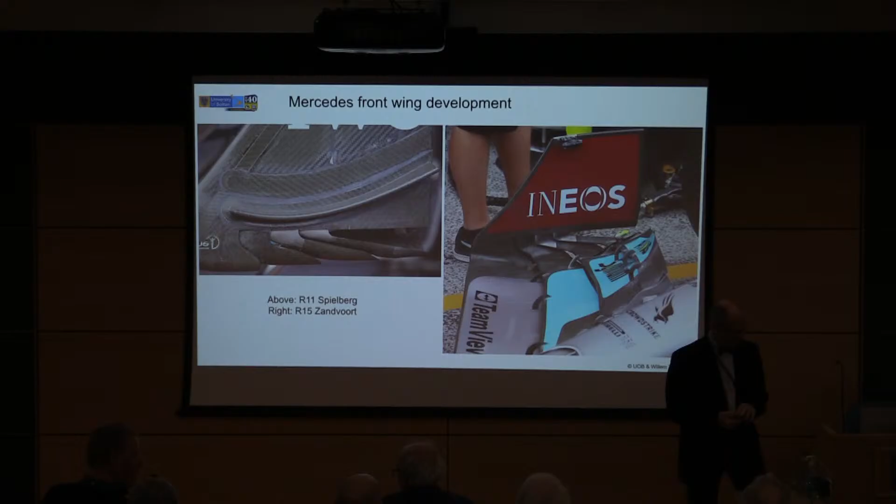Any questions, anybody? I'll wander around with the mic. Don't all be shy. You don't want to be shy. I don't. Coming up the back. Hold the line, caller, I'm quite relaxed. Bill, in the meantime, shout. Just pass that along. Hang on, wait.

Was there any effect of change from 13-inch wheels to bigger wheels when it came to the porpoising? Was there any impact going from 13-inch wheels to 18-inch wheels in terms of porpoising?

I'd say honestly, no. We would have had probably a worse problem because they eliminated the mass dampers. We probably would have had a worse problem with the balloon tyres because they were literally a low damped spring. It's a damped spring, but it's not got much damping, and the inerters were used to counter the main tyre frequency of vibration. So I'd say probably not.

Initial cause, definitely aerodynamics. A normal tool the engineers would have used to fight it wasn't there anymore. I'd say they're the primary things. The big wheels have been really nice for managing tyre temperatures and brake temperatures. We've got space to burn now. It's fantastic.

So in relation to the pressure diagram of the side profile of the wing, just how drastic of a difference does a Gurney flap make to the efficiency, the aerodynamic efficiency of a wing?

So I do a whole lecture on Gurney flaps. Dude, I love Gurney flaps. A Gurney flap is a 90-degree-ish angle, normally on the end of a wing profile. The first part of a Gurney flap is extremely powerful.

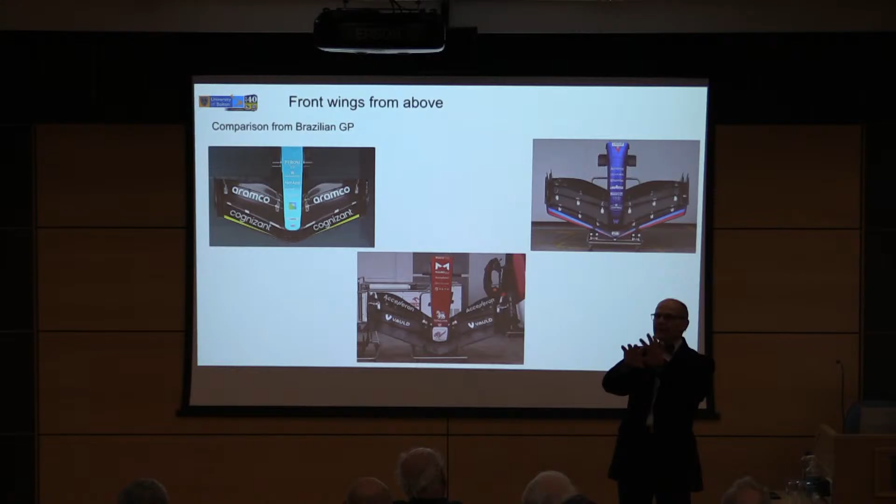So there is a question over here, Mark, when you're ready. Okay, over here. Yeah, next. So during the period of time that you've been in F1, what have you personally seen as being a massive and drastic impact within the aerodynamic industry? So what's the most efficient car within aerodynamics that you've seen during the years? Was it like 1980s, or as recent as 2000s? What's the most efficient car?

So there are lots of things that aerodynamics departments do that maybe make a difference to the world. We do some stupid things, like the rules force us to have a limit on how many teraflops we use, so we take certain bits out of computer chips, get them specially made so that they can't do real world work, but they work better for Formula One. That's nuts. That's just nuts, yeah?

I've seen no cars - I'm getting there. But also, we do some really interesting things. We write software that allows you with the same compute power to do much more useful computational fluid dynamic work more accurately. All the teams either pay their commercial suppliers or write their own codes. There's some really good jobs in Formula One writing codes that in the end will end up in the public domain. It might take a while, but most of the teams work with commercial code suppliers. They write a better code - they're not going to sit on it for 20 years. You might pay extra money to get them to sit on it for 5, but after a while all this stuff is already filtering out.

So that, for me, is a bigger contribution than anything else. The most efficient car is not going to be a Formula One car. It's going to be something like a sports car.

Formula One cars generically sit at 4-to-1, 5-to-1 downforce-to-drag ratio. I've designed a hill climb car for a mate that's sitting at 6.5-to-1, but that's completely different regulations. Sports cars got to 9-to-1 in, say, the Silk Cut Jaguar days, where the rules allowed them some freedom. The VW I.D. R that went to Pikes Peak and set the outright record with an electric car is sitting somewhere in the range of 9-to-1. But I've seen cars on the drawing board and worked on cars that are 14, 15-to-1.

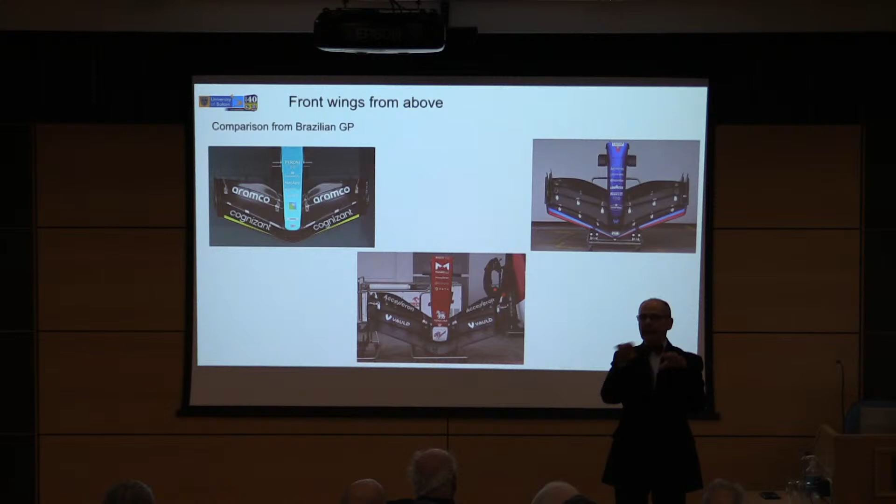The Formula One teams will know, on an average racetrack, if we increase downforce at 2.5-to-1 - the cars are sitting at 4 or 5-to-1 - most tracks we're going to go faster. But you use more fuel, so you've got to balance that at the end of the race, or you're going to run out of fuel. So they balance it for the race where you need higher efficiency.

Whatever competition you're in, the trick is to understand what you have to achieve to make the category you're competing in more competitive.

I've definitely seen a pattern with boats, cars and planes - they've both got a pattern within the F1 kind of criteria. So with the wing and whatnot, it's very similar to a wing on a plane. When I found the pattern with those three aspects, it's easy to transition into it. What's quite cool.

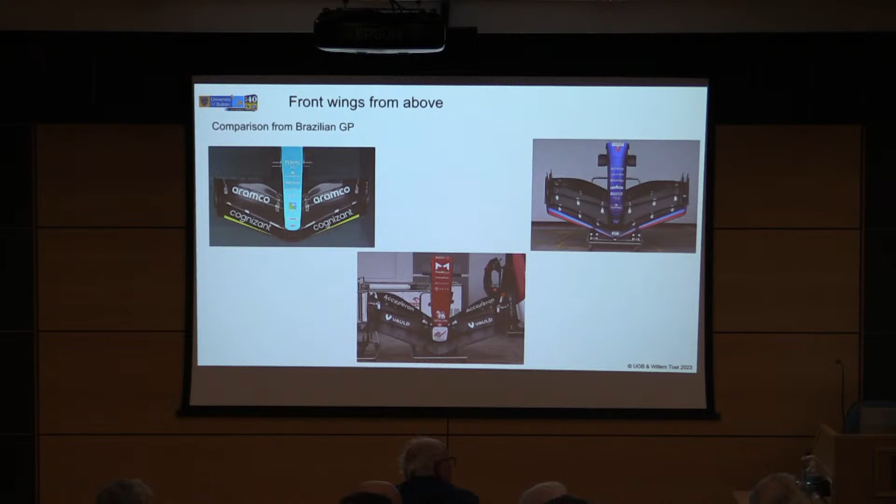Oh, excellent question. I'll repeat it: with temperature variations on a track, is there an impact of hot or cold temperatures on a track relative to the temperature higher up? I'll give you a few examples - the first is wind tunnel testing.

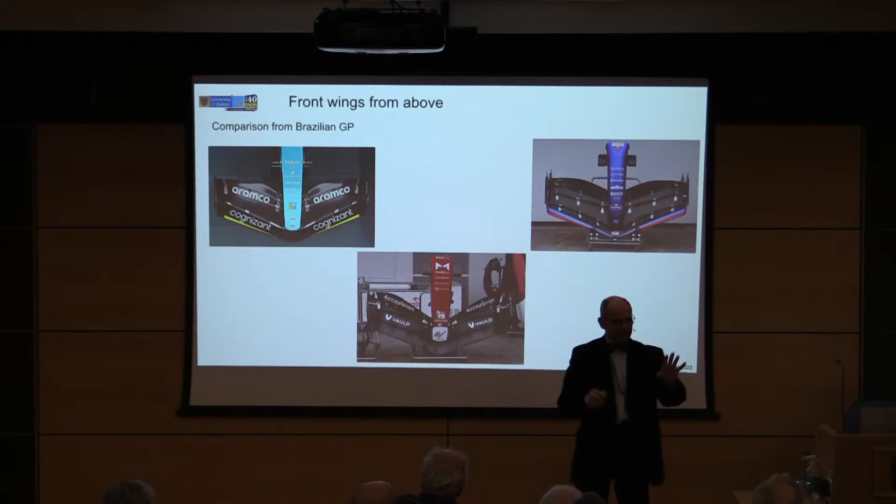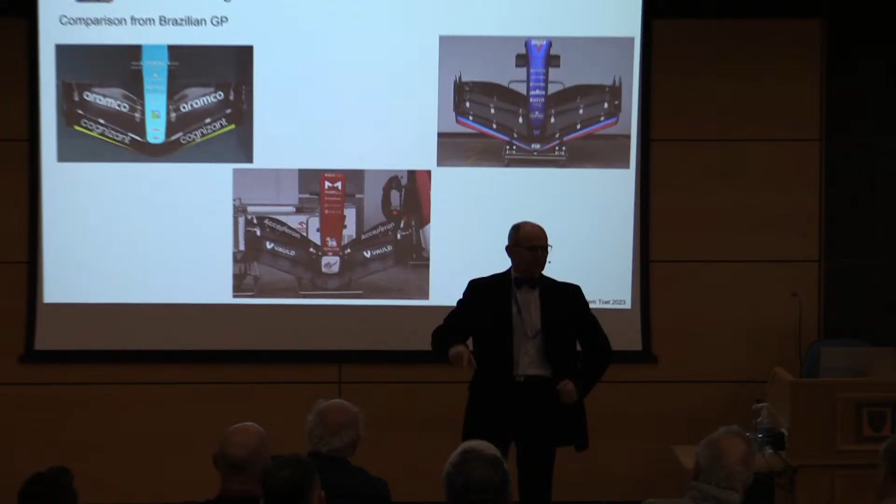Wind tunnel testing, we started with just a supermarket conveyor belt on steroids - a moving belt so we put our model on it. Then the belt would lift, so no problem, we put suction and sucked it down. Then we had heat issues - bugger, okay.

My experience with heat, before we put cooling under the belt, was testing at Imperial College in London. At the beginning of the day, when the belt was cold and the air temperature under the belt was cold, we had fantastic numbers. At the end of the day, with a hot belt, the numbers were crap, and you'd reject things you were trying. Then you'd come in the morning and have a step in the data again. So we knew from wind tunnel testing this is absolutely key.

Then you go testing - another race car example, Ferrari '95, '96, massive pressure from the bosses, new aero kit arrives. We do a baseline run first thing in the morning - takes 2 hours to change - then you do your new super-duper test parts at 11:30 in the morning, asphalt at 60 degrees. Driver says, this is crap, this just doesn't work. Run for a while, okay, abandon, put the old package back on, let's do another back-to-back. So you abandon, 2.5 hours later in the cool of the evening, go back - the baseline's much better than the test part.

I wasn't at the test - I was head of Aero there, and I wasn't at the test. You look at the results and think, classic, absolute classic. Okay, we've got to go with 2 cars: one car's got the new package, one car's got the old package, both tested in the morning, both swapped, tested at lunchtime, swapped back again. We had to do that before I could convince the drivers and race engineers that, absolutely, temperature is critical.

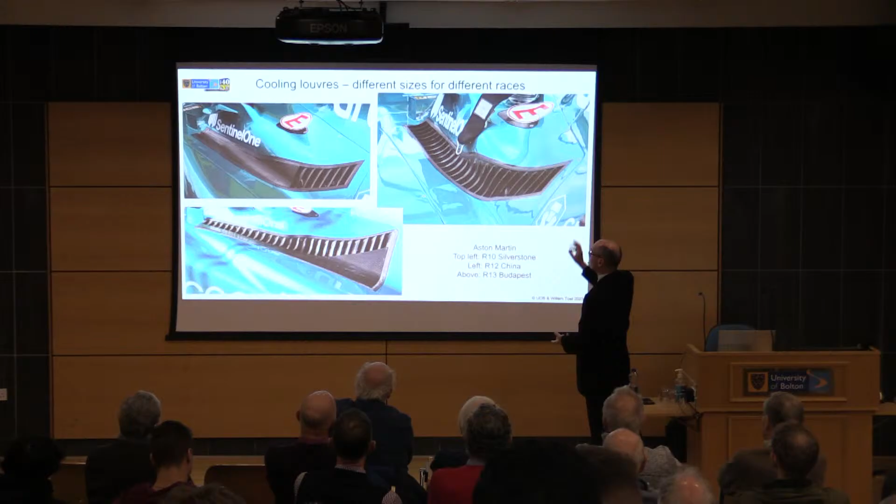And when you look at the louver panels they have on the cars - I just want to say there is still diversity in the current Formula One teams, because there's all the different front brake ducts of the teams. The louvers, I did have a lot of photos, but you get different louver arrangements for different events. The louvers are something that we will move this year, and they're located in an area where there would normally be a mild amount of lift, so by putting the louvers there, you eliminate the lift. So there's quite different solutions on the louvers as well.

And so Mexico, you would go open. Yeah, you would go properly open. Not like that.

I'm just mindful of time, Willem, and I don't want to stop you because you are the Duracell bunny. I apologise, we're over time.